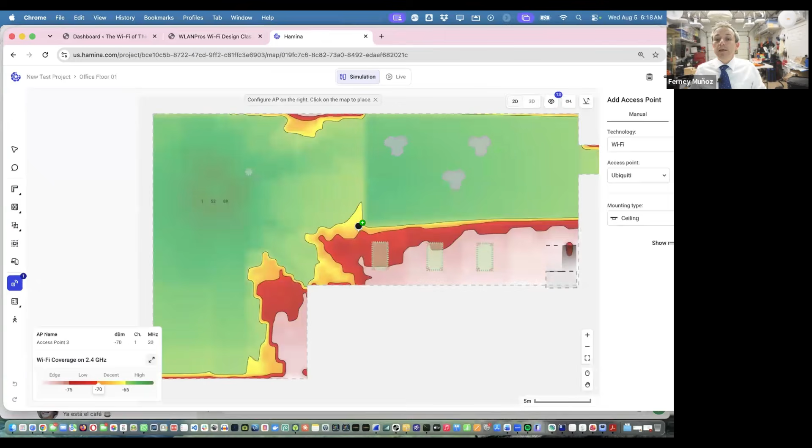The thing about slab, remember that we didn't know what the attenuation was? It was if you only, let me just bring this guy over here. This window's too big. Okay, if we go to slope floors, it's actually raised floor.

Yeah, slab only. If you choose slab only, because what we're talking about, for those of you who haven't been here, is when we add the attenuation to the floor, when you create the building, you add attenuation for the thickness of the floor in here, okay? The slab, in this case, when you add this slab, let me just show you the options. If in here you mark slab only, then the attenuation is the attenuation of the overall floor.

See, when you remove that one, you can specify what that slab is, because you might have some areas where, yes, the floor is a certain thickness and certain attenuation, but you might have stairs or other areas that have a different attenuation index. So you can come and specify what it is. If it's maybe just 5 dB per meter, or if it is actually thicker, then you can specify that here. But if you do slab only, you don't have that option to specify the attenuation, so it inherits the attenuation of the floor, which you specify when you create the building.

See, I went here to this option below the walls, and then align floors. That's when you create the building, and then you can drag and put more floors in here. Then you specify if there are floors with more or less attenuation than the other ones, okay? One thing that they don't have here that you can set in Ekahau is the thickness of the actual floor, okay? Because some floors are thicker, some others are thinner, so you can specify that in Ekahau.

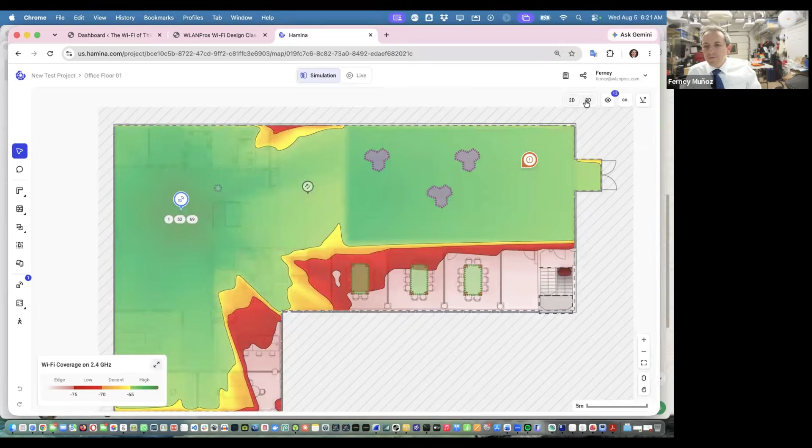So when you are doing just one floor, the height, let me just come over here. Let me just show one floor only. There we go. What he's asking is, this takes a long time to draw all the walls and doors. And then on top of that, if you're going to start drawing tables like this, is it worth it?

Because here's what happens. We have an access point. The access point is sending waves, double the distance. Hamina is just doing math, and it attenuates going through that wall and attenuates going through this glass. And then by the time the waves get to the top of this table, that signal prediction, you just switch this guy. Actually, let's move that access point here. Let's say I place it in this conference room right there.

The signal prediction, if I have my mouse over here, notice on the lower left corner, watch this guy that is green. As I move the mouse, there is a slider bar that changes the value. This value says neg 48, neg 46, neg 44. Right on top of the computer it says neg 50.

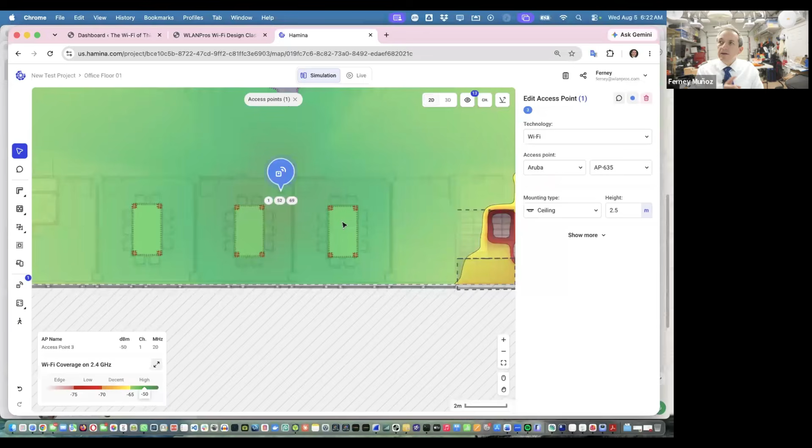So this signal prediction, see if I come to the global settings, by default is at 1 meter from the ground. Ekahau does the same thing. Yeah. By default, if you don't specify the height of the signal prediction, it stops at 1 meter from the ground.

Now, why 1 meter? Because the top of the table is normally at 90 centimeters from the ground. Okay, so you do signal prediction, double the distance, square the power, then signal power. Then what is the signal here on top? But what if you want to know what the signal is at ground level?

I went to schools, I walk in there, I was doing the analysis, and there were no chairs, there were no tables. And I asked the teacher, "Oh, are you guys cleaning or remodeling?" They said, "Oh, no. Here we're against the policy of having children sitting strapped on a chair and a table all day. So we let them roam free." And they had bean bags and all kinds of stuff just laying around for kids to just be whatever. So what is the signal at ground level?

Because we always think a client is a human holding a device, a computer, or a tablet. No, a client can be a robot. We had in the first part of the class, when we talked about the clients, the client can be a truck. The client can be a robot. Let me see, where's my stuff here? WLANPro. This will work. Let me open this real quick and remind you of what clients can be.

Because when we're talking about clients, where are the clients? So it can be sitting on chairs. The APs are under the seats. We did this at the University of Utah Stadium because we did the survey when there was nobody around, and it covered the entire thing. And then it is different when it's crowded with people. This is at the Sphere in Las Vegas. The access points are in boxes under the seats.

Clients can be inside a metal box moving around if it's a hospital and they have these metal enclosures. So the client is going to have a hard time sending and receiving waves inside those metal boxes. So in this case, I will have to look at just a little bit above 1 meter from the ground. In this case, the signal prediction, see, the antennas are up high. That's like 2 meters from the ground, okay?

The clients may be down at ground level, so it's 10 centimeters from the ground. The antennas on these robots are inside. They ended up putting the APs down low. So for that reason, you can change the height of the signal prediction. By default it is 1 meter. So the question is, is it even worth spending all that time drawing all those tables? Well, let me tell you where it's valuable.

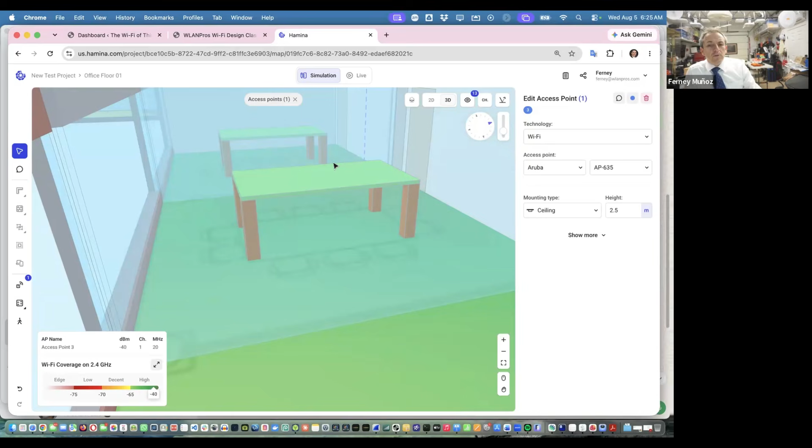If you're just one floor, and everybody has tables and the devices they're going to be using are at the height of the table, then it doesn't really matter if you put a table or a block or nothing under, it's irrelevant because the signal you're trying to predict is at 1 meter off the ground. But if you have multiple floors, let me just go to a 3D view. Right now I'm on the first floor. But what if I have

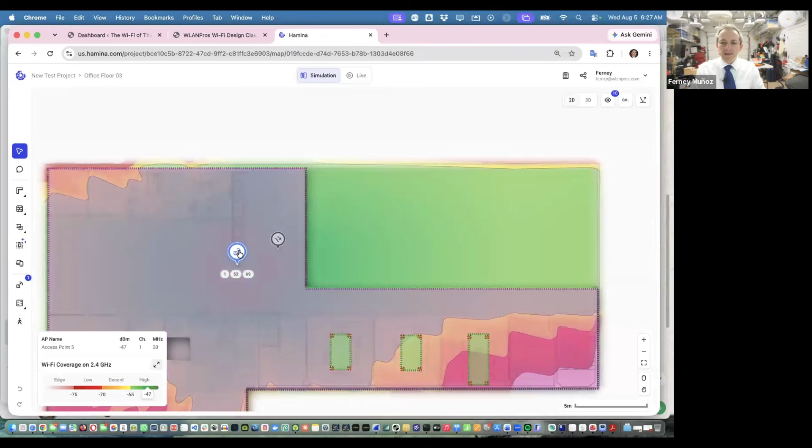multiple floors? If I have an access point here, the signal prediction for this one, let me make sure that I have Wi-Fi selected. Yeah. The signal prediction is going to be not only on this floor, but it's going to show how much of those signals bleed to the floor below. So let me go back to floor 3. If I have this one selected, let me for now hide the attenuation areas. We don't have the ceiling, because we learned yesterday how to draw a ceiling.

If I have this AP selected, on this floor the signal prediction is horizontal at 1 meter off the ground. If I go to the floor below, notice these access points. The access point on this floor is this one. Let me delete it. I deleted it from this floor, so this floor does not have any access points. Notice there is a grayed out access point with an arrow pointing up, meaning these signals are coming from the access point on the floor above.

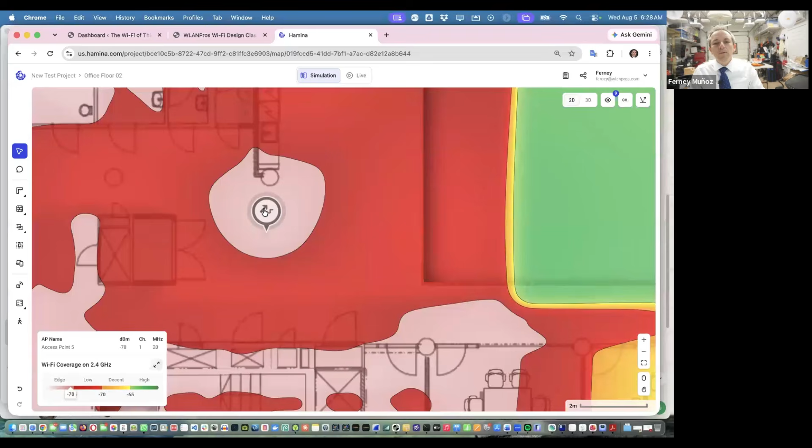And these signals over here in this conference room are coming from an access point on the floor below. I don't have any APs on this floor, but this one bleeds. So in that case, Gurpreet, having tables and stuff matters, because watch, if I go to this access point on the floor above, let me move it. Let me go to floor 3 and move it over here. I just put it right on top of this one.

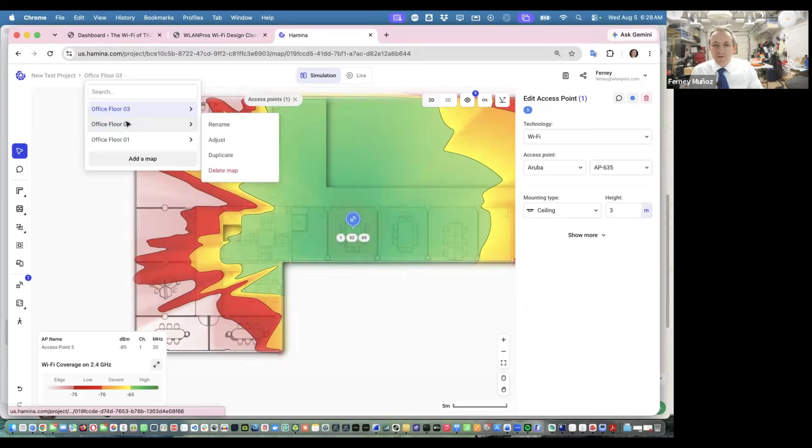So if I go to the second floor, the floor below, and let me actually go to the first floor and move that AP out of the way so we have a clearer view. Let's put it in this back corner for now. Okay, so let me go to the second floor.

So it shows that these signals are bleeding from an access point on the floor above. That's also taking into account the thickness of the floor. Watch what happens if I say the floor on the third floor is not 20 dB, it's only 10 dB per meter attenuation, you know, a thinner floor. So let's just go back to my signal prediction; notice how much more signal from that AP bleeds down.

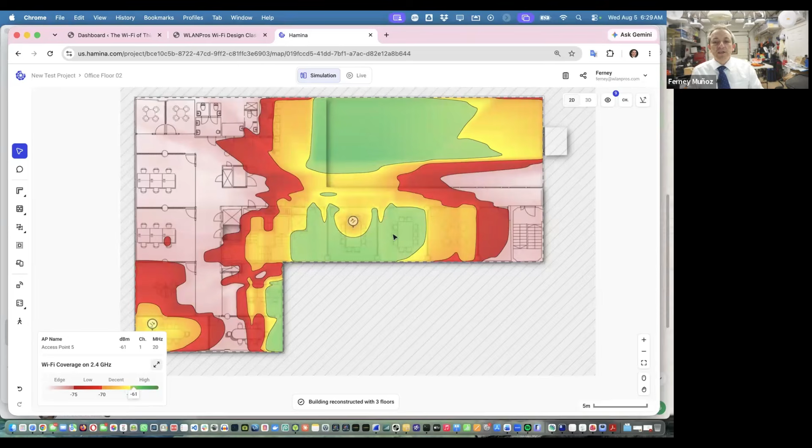Now watch this. If I go to the third floor, because right now under that AP, let me look at attenuation objects. And here's what I'm gonna do. I'm just gonna move that ceiling out of the way. Let me click on this guy, just delete it. I got rid of the ceiling. So I have a table. If I don't have a table here, see, I just deleted the table. Why didn't I delete the other 3 legs?

Let me move this AP to the side. Let me delete these legs and put the access point there again. Watch this. If I go to floor 2, I have more signals bleeding down now because I don't have a table over there. So when you have multiple floors, Hamina is not just doing signal prediction horizontally. It's also doing vertical signal prediction and takes into account not only the thickness of the floor, but also tables,

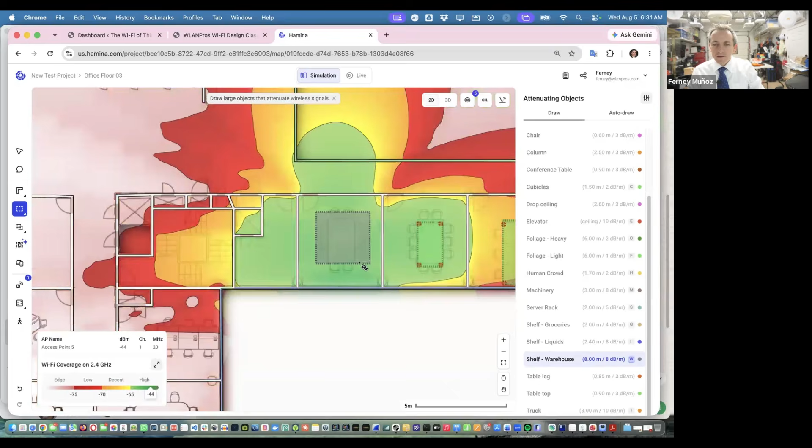racks. Look, if I add another attenuation object, let's just add column, chair. Where's the warehouse rack? Shelf, warehouse. Let's do this warehouse shelf. And let's just add one in here. Okay. I'm on the second floor. Let me go to the third floor. Let me add one of those over here. Okay. So now if I go and edit this guy, let's change the height not to be too dramatic. It's not 8 meters. Just say this is 1.2 meters in height.

Okay. So if I go to 3D, I just added those 2 racks or shelves in there. Let me go to the second floor. Okay, floor 2, right there. Go to 2D and delete this guy. Let me just come to the arrow. Delete this guy. Delete this guy. There you go. So now, remember it was really green before when I had nothing? Now that I added

that, the AP sends waves: double the distance, quarter the power. It hits that, it attenuates, then it hits the floor. Those waves get weaker, and by the time it hits this floor, it's not very strong. So yes, adding attenuation areas matters, because I'm looking at the bleed. And sometimes we want to make sure that if something bleeds down, then maybe relocate APs, because we have to keep that in mind.

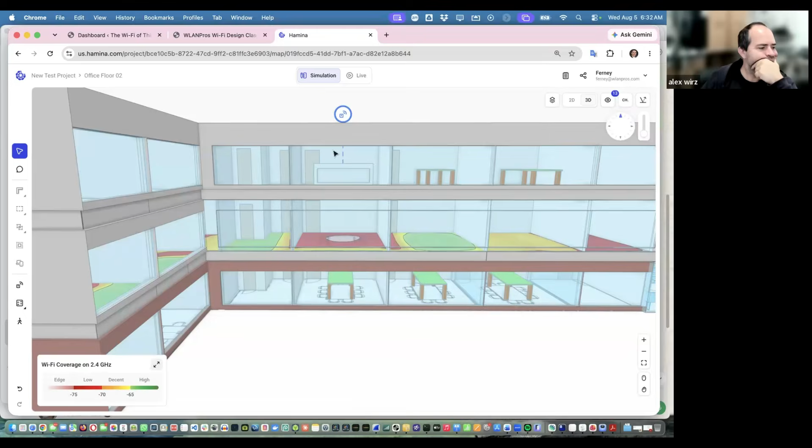You don't want to have it like, oh look, this room has coverage from the floor above. Don't rely on APs from other floors as your source of coverage or secondary coverage. Those are things we have to keep in mind, because now if you remove this guy, or let's just move the access point to the room next door. See, if I move this over to this table and go back to 3D, then it has more signals bleeding down, because I changed the attenuation.

It's just that here I can change the thickness of the floor or reduce it. In real life, you cannot just tell the customer, yeah, that AP from the floor above is bleeding too much down here, I recommend that you add another layer to the floor. That's not going to happen. You're not going to add another layer to increase attenuation. Then you have to start playing with power, location of access points and stuff. Go ahead. Somebody had something.

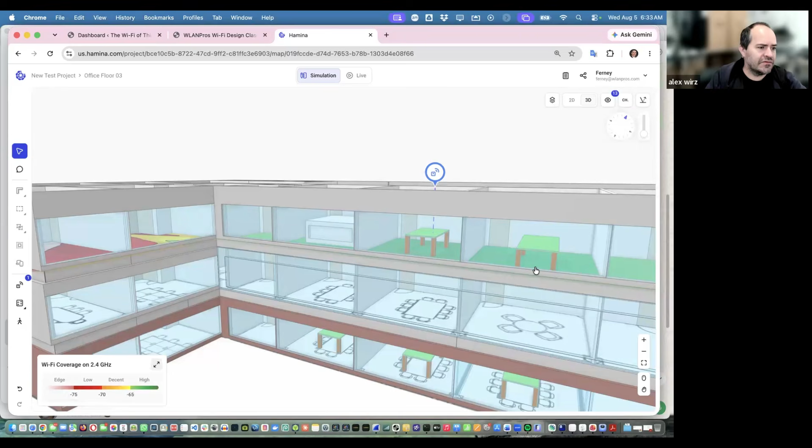Yeah, me. So the way I deal with this, but I'm mostly working on offices, not more complex environments, is I'll leave this for the post survey. So with the real measurements, I can select all the access points on a floor and go to upper and below floor and check how much signal is bleeding to these channels. But I think for predictive, sometimes it could be too much work, depending on how precise the environment requires you to be. It is way too much work. And that's why I never draw something like this with a table with legs.

You're kidding me? I would never do that. We did that in here just to show, you know, how to do it if you really have the time. But yeah, it looks good, but in reality, you just don't have time to do all this stuff. Check another thing I did in the chat window later.

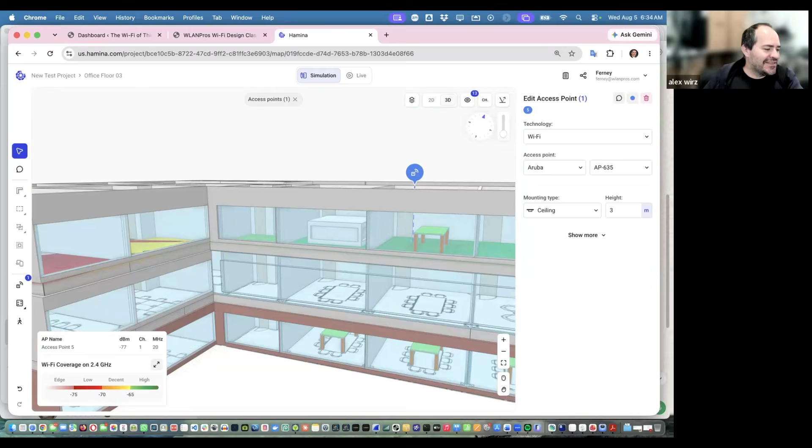So just one other thing, Ferney. I think, as Alex mentioned, you can do an AP on a stick. You can understand the bleed-through between the floors. That's something measurable. You can add it on. But remember how you were showing yesterday the duct, for example, or even at the care center, you had that big round thing in the middle of the floor. How do you find the real measurement of that object that's hanging in the middle of the air? Over there, when they had the things on the ground before they moved them up, I could measure the attenuation of that. But once they're up, it's really hard to measure.

The one thing you can do with the access point is just try to avoid those locations altogether. Because the problem is when you end up with those access points and then they put stuff underneath. Christmas decorations. At a shopping mall, they have the access point. It's all empty, but then Christmas comes, they put a fat Santa with a sleigh and deer hanging from the ceiling as decoration. Now that's in the way. Then you have to simulate those and get the attenuation of those things. How are you going to get up and measure that? So you just try to avoid those altogether.

Some of those are hollow, some are foam, but some are wood, or some are screens that are just metal structures or trusses with speakers. That's just solid metal with electronics. Try to avoid those altogether and put the APs, as I did over there, below those structures. I drew them more to show the customer, look, that's where the lights are, we have to avoid the screens. And then I drew a screen, because we had issues with the AP being in front of the screen. So we had to move those APs up and out of the way.

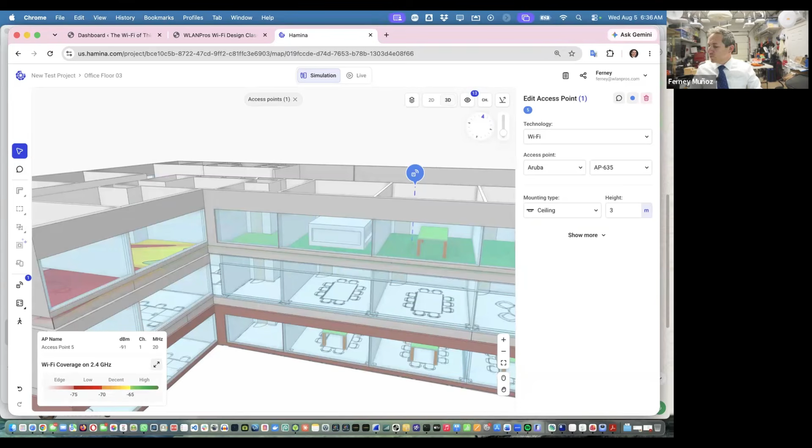Hi. In addition to attenuation, I believe in some sensitive designs, drawing tables or obstacles like that may also affect the wave behavior itself, like the scattering, reflection, refraction. I didn't have a chance to compare a predictive site survey and an on-site survey with Hamina. But I believe the time I could save drawing the walls and the building in Hamina compared to, for example, Ekahau, I could spend drawing the real infrastructure, like the tables, everything else.

Well, Walid, now you mentioned that, let me show you my absolute best and favorite feature.

Good morning, Tom. Morning, sir. Early. California. Okay. All right, Walid.

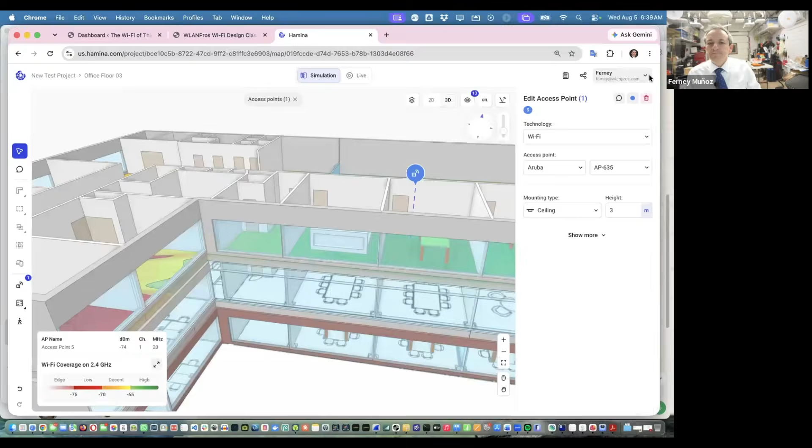Watch this, man. Guys, this is my absolute best and favorite feature from Hamina. Ekahau doesn't do it. Cedos doesn't do it. Wavelify doesn't do it. Hamina does. This is a predictive design. Let's say I go to 3D. Nothing here we haven't done. Well, putting colors on the APs, that's something we haven't done. I'll show you how to do that today.

So it's a predictive design. There are walls and doors drawn, access points placed. I did a survey of this facility, okay? Access points were placed, and here's the story behind it. See, it is all green, well, most everywhere. That's what we proposed. The customer said no, that's way too many APs. Let's remove that AP. We said okay, but you're going to need it. No, the AP from this room will cover that one, and the one from this room will cover that. We'll remove this AP. Okay.

So I left the AP there, but we made it red so I can highlight which APs the customer decided to remove. They left these APs and removed these, because they assumed this AP would cover that area and this AP would cover that area, so they didn't need those. This is a senior care facility where they take care of older people.

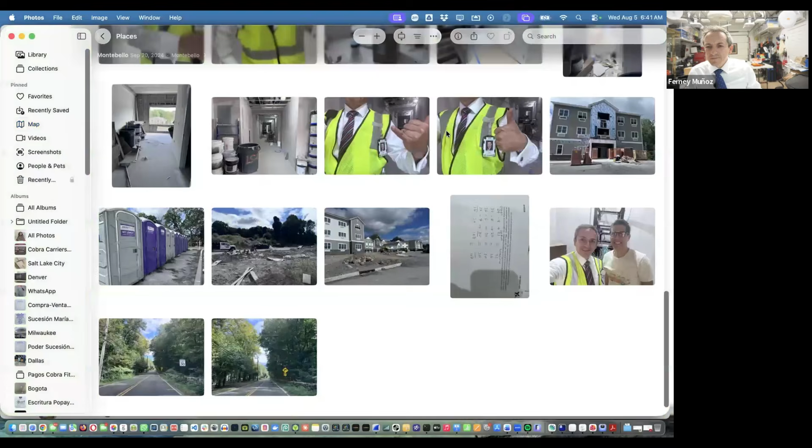Because I go do a picture. That place was ready. They said, yeah, go and do a survey. The place is finished. The place is ready. That was in upstate New York. That was actually not upstate, but it was about here, I believe. Let's see. Yes. They said the place is ready to do a survey. They're done. Almost ready. So yeah.

I go there. There's a big facility, multiple floors, and then I start doing my survey. And I ask the guys, how late can I stay? Because this is pretty big, I'm not gonna have time. And I was fixing cables and stuff, multiple floors. I can stay as late as you want. When I leave at night, the gate was closed. So I leave the car there. I'm small enough that there was a gap on the gates that I could go out, and I ordered an Uber. And while I was waiting for the Uber, cops showed up.

Here, where's my stuff? Cops showed up on the front and on the back of the property, coming from the building. I mean, look at the amount of cops. I had 3 cars on the front and 2 on the back. Lights on my face, hands where I can see them. What are you doing there? It was like 10 at night. What's the time? 10:35. And I could explain what I was doing, right?

But here's what happens. I go to a facility, do a survey, and watch. Eyes on the screen. I switch from design to survey, and it just shows me what the attenuation of objects and walls was. Again, simulation, same project, okay? I just open that on my phone. We'll get to surveys later in this class. And then I go in and do a survey. See, in here, there are no walls. It's just my walking path. So now I can use this, and this is what the other guys don't do.

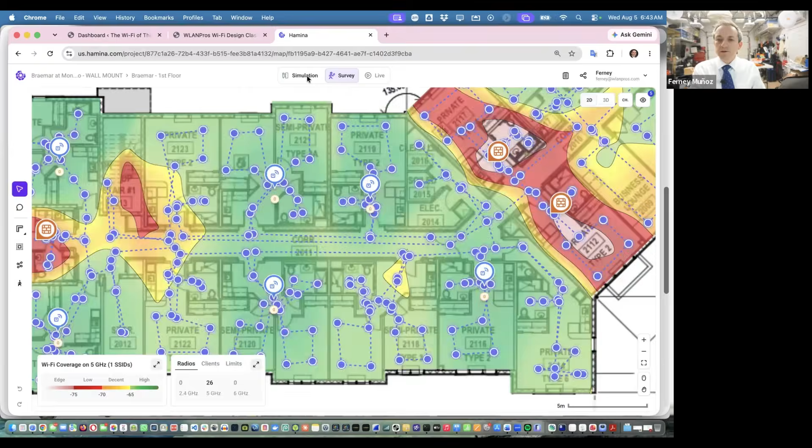Watch, let's say I move this to 3D. Let me go to simulation and move it to 3D. All of you can do this. Now you know how to draw walls. Now we're going to learn how to do the APs and move them around. This is the predictive design we present to the customer. See, if I zoom in and move things around, zoom out, and if I go to 2D, that's the area. 3D, that's the area. And I can switch from simulation and survey.

My map stays right where I left it, which is really great because then I can show a customer where the signals are not very good. That's what we recommended in the simulation, that you'd have APs, but you decided to remove them. So this is basically what you use as a warranty, or the "I told you so," just to show, look.

Did you measure the wall on your predictive in order to get the right dB? Not on site, because when we got the floor plans, the place did not exist. They were building it. So we couldn't go in there and measure, but based on the floor plans they gave us, we used estimated values, if they were brick or drywall. So if I go to 2D, I can see that these areas had brick. Is that brick or is that heavy? Let's see, drywall 4 dB. This stuff is concrete, 15 dB.

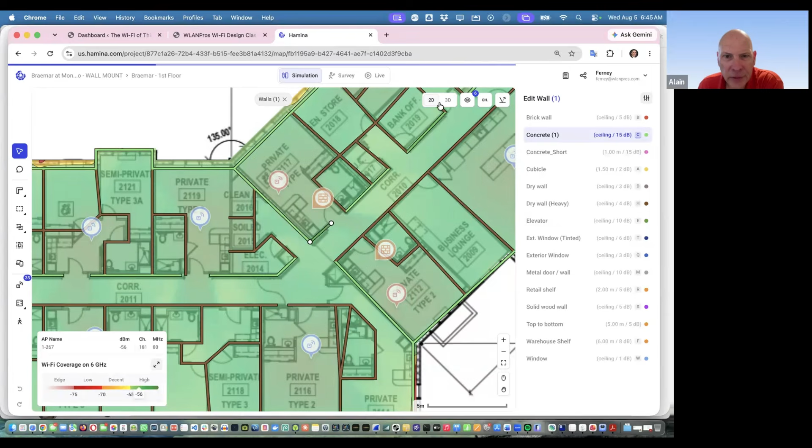Because the floor plans, see, if I say don't show me walls, Hamina identifies in the drawings that this is thicker, either brick, cinder block, or concrete. So those are concrete. These ones are drywall. If I say show me walls, see the difference? Yeah. So that's what we use. And then when you go on site, now watch this.

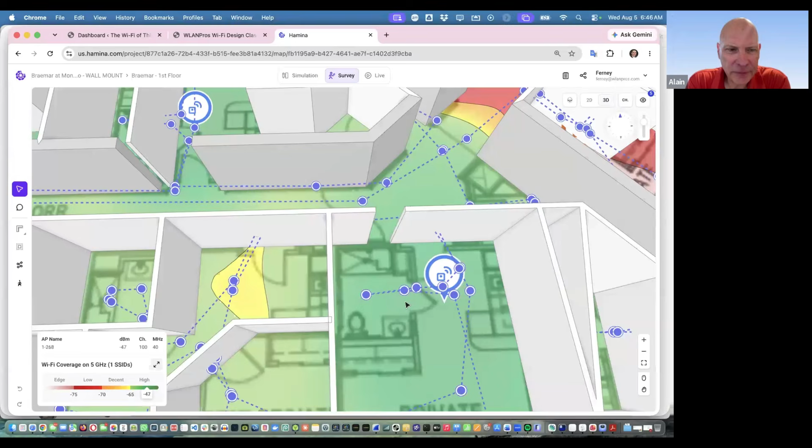All I do is walk, click, walk, click, walk, click. And some people say, oh, Ferney, why do you spend so much time in the bathrooms? Yes, I go and survey every bathroom, especially in this place, because this is a senior care facility. Where do older people usually fall and break their hips? In the bathroom.

So I want to make sure, and not only do I go and survey in there, I go in, close the door, and then survey and get the readings from inside the bathroom. Because if the older people are wearing a bracelet or a necklace piece that they can just press a button and call emergency in case they fall, and that's wireless, with Wi-Fi, then I want to make sure that there is good Wi-Fi there. So that's why it takes time to do a good survey, because I walk every corner of every room, including bathrooms, to get enough readings.

And what I measure in here, that's measured. Here's the best part. Watch. If I go to my simulation and I come down here where the readings are, since I already went on site, when I am doing my design, I can also use data learned from the survey. Ekahau does this, and they've done it for a while, and I love that. If you do a survey, you can use this data to do your design on top of the survey, because then you can say, if I was here and I have an access point, let's say I select this access point.

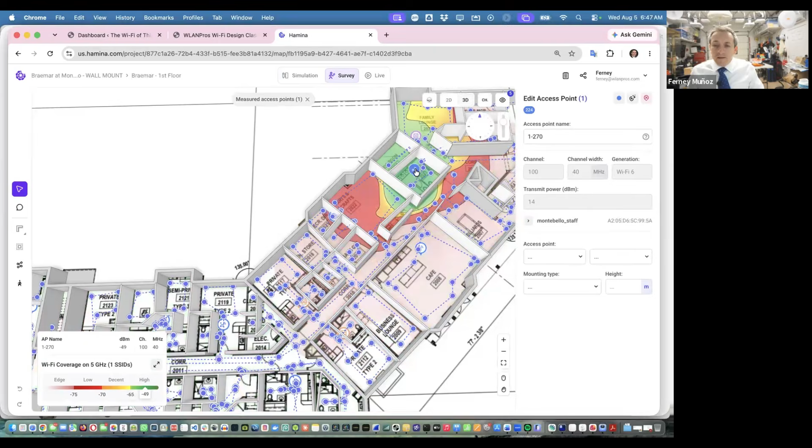This is measured. If I am there, the signal's pretty good. Next door, it's good, but not as good as in here. Same in here, and in here where it's yellow, it's like neg 69. See the lower left corner where it shows you what the signal is? As I move the mouse, right here, the signal is neg 56. I'm closer to a wall. Here, neg 69. Here, neg 71. So this is accurate because it's measured.

I was there. So if I was here and I measure you at neg 45, and then here I measure you at neg 47, then it's going to start using the attenuation that I measured from one side to another. Let me just hide the walls here for a second. Let me come over to my simulation and tell this guy to not show me the walls. Come on, 2D. I gotta go to 2D. Let's tell this guy to not show me the walls.

So what it's doing in the design, if I'm going to use survey data, is it uses what I measured here and what I measured there and extrapolates the data. If I saw you here at neg 45 and there at neg 47, it's going to say, well, this is probably a 2 dB wall. So it's going to use survey data for your design, and you don't have to draw walls. In that case, you just place access points. Ekahau does that. Hamina does that. And I think Tesos uses AI also in your designs. When we get to Tesos, we'll talk about it. But that's one of the advantages of being able to go on site. Not always can you go on site.

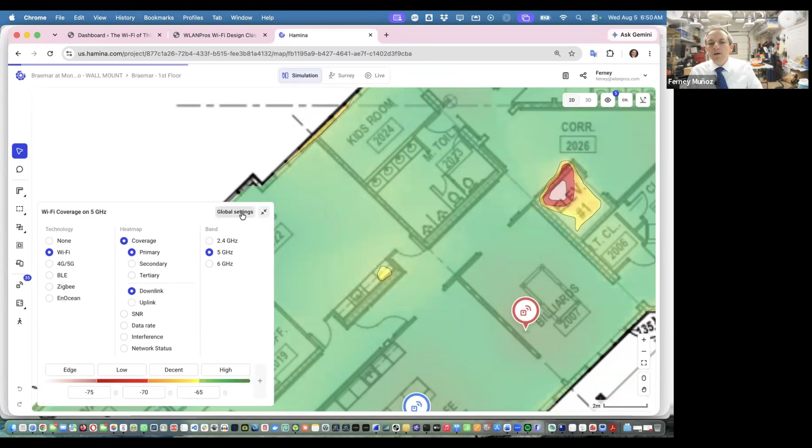If I go to the global settings, here is where we can set the opacity of the signal prediction, very clear or very dark, so that I can almost cover the map beneath me. This is the first setting. I like to have it in between. I want to see the signal, but I also want to see what's there. Oh, that's the bathroom. Because if I have it this strong, I don't know what's underneath.

The next setting is going to be client height. That's what we talked about. By default, it's at 1 meter. But what if I want to know what the signal is at ground level? Like, what is the signal?

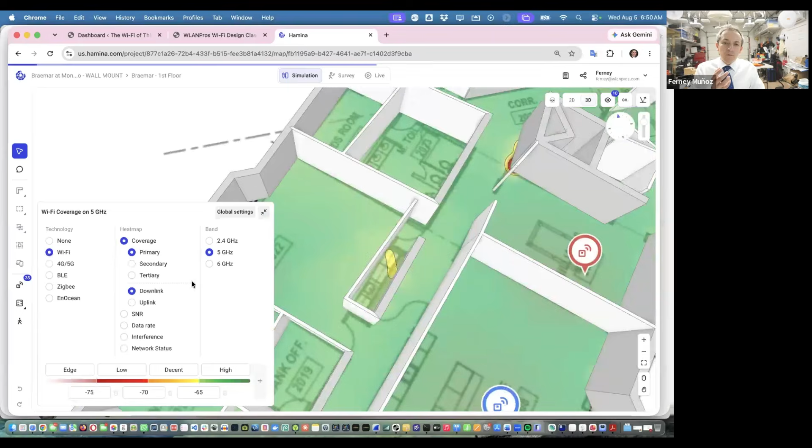Not at 1 meter off the ground, but how about lower than that? Because I want to make sure, for instance, in the bathrooms, what the signal is at 10 centimeters from the ground. In case a person falls, am I going to have enough signal at ground level or higher? Because when we were looking at the warehouses, if my antennas are at 2 meters, where are the signals going to be at 2 meters from the ground?

Then down here, AP shown on mouse over is this. If I put my mouse in here, notice to the left, there is a list of the access points I see there. We got Hamina to fix this for our survey in Toronto. This is new, because before, if I saw 80 APs, it showed 80 APs, but it showed me the bottom of them. So I could see the bottom 40, the weaker ones, and I want to see the top 10. So they changed this for us just 2 weeks ago.

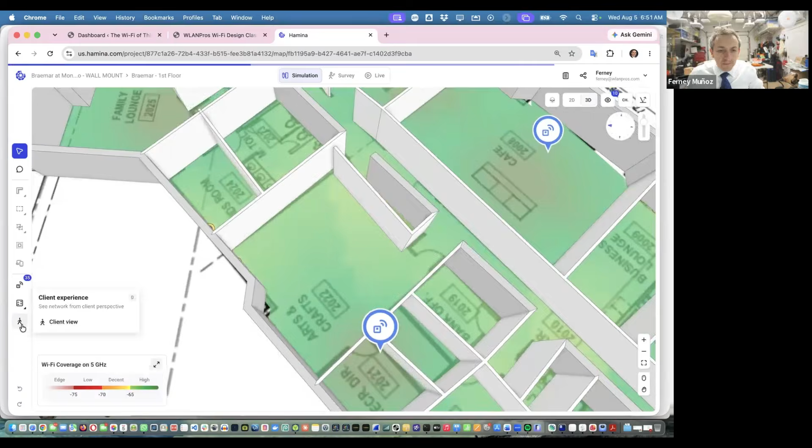If I come over here, global settings, on mouse over, I can say, just show me the top 8 APs or the top 3 APs. Below, that's the client height. In here, see that little man right there, Elaine? Yeah, I do. That's the client view, okay? That's basically what we call in Ekahau offset.

What does the client view? Which client? See, there's a list of stuff here for Wi-Fi. Let's say a phone, an Android phone, a MacBook, an iPad. So what would an Android phone see? Let me just go over and make sure that we do have it. See the little guy right there?

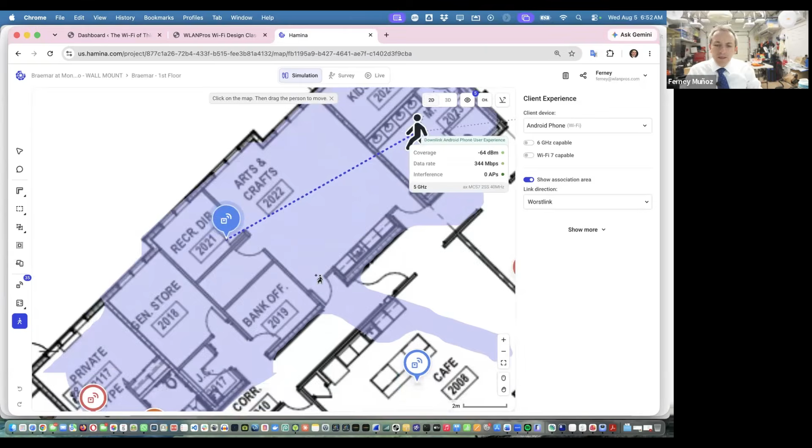Once I click on it, this is what that little man, that client, that Android phone would see in this area from that AP. This is doing kind of like the offset, but more realistic, well, realistic and not, because it's still simulated, it's just doing math, saying, okay, if I am the client and as I'm walking, which is my strongest AP in this area.

But, Ferney, you're under simulation now. When you do it on Ekahau, you would be under survey with measured stuff from your Sidekick too. Right? And then in here, if I do the survey explorer, it shows what I measured that day with whatever device I was using. In here, let me see if there is a way to set offset. I think Hamina believes that offsets are not required in here. Let me see.

Sorry to interrupt, but that's what I was really wondering about, because yesterday I made a simulation in Hamina and again in Ekahau, just to compare, because I recently heard them say, we don't believe in offsets. We believe that minus 65 should be minus 65, whether you're in simulation or measured. You shouldn't be worried about that. Your software should just always say minus 65 is minus 65.

Good news, the simulations look identical. So that means that the math is indeed the same. But it also means that minus 65 simulated on Hamina is the same as minus 65 simulated in Ekahau. And if you measure with the Sidekick, obviously that minus 65 will not be the same as the minus 65 you get from just the free space path loss. So that makes me really wonder how they treat this, if they indeed alter the measurement from the Nomad or the clip to represent the minus 65 from the simulation, or if they just haven't done that completely yet.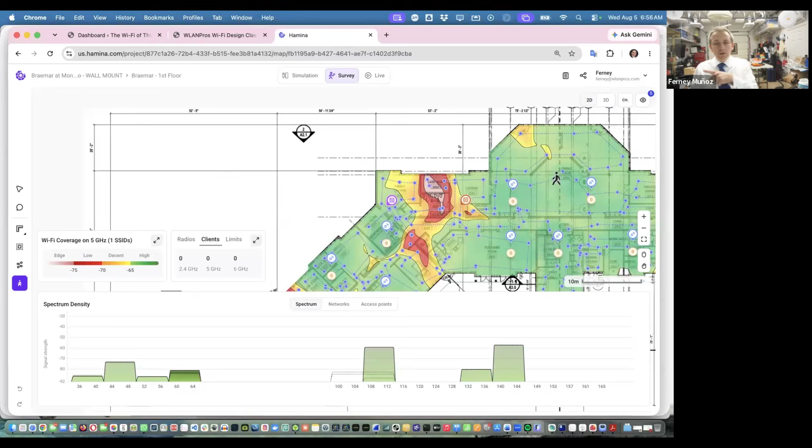If I was going north-south, I got one heat map. If I was going east-west, I got a different heat map. It's just nearly impossible to get a repeatable heat map. I tried roughly doing the same thing, to make a comparison between the simulation and then the Sidekick measurements, to try to make a kind of offset between, say, free space path loss and then the receiver end of the Sidekick.

But there's such a big difference in measuring in, say, a football field where you're completely open, and just your street, which is also kind of open, but you do have some houses and cars parked with some reflections, which already alters this factor so much that it's really impossible to come to an accurate measurement, to say, well, this is roughly the offset for every situation. It just differs so much that it's quite hard to just say, oh, let's just compensate the measurement with 5 dB, and that's what we should see in the simulation, or vice versa.

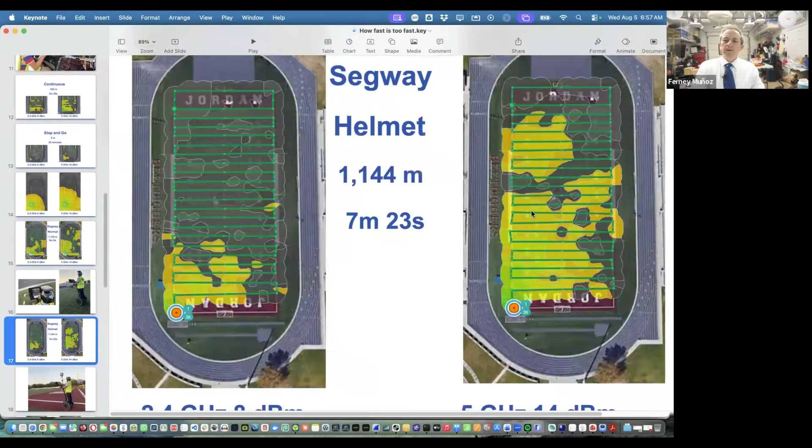And that's why I ended up going to the salt flats and just playing with Wi-Fi over there, for what you just described. It happened that I was doing surveys in a football field, and I came across a phenomenon that didn't make sense. I went to a football field because it's open. There's nothing. And here's the access point. We set up one of these trusses with access points in one corner of the end zone, an access point at a certain height sending waves.

It's open space. Free space path loss: double the distance, quarter the power. As I went away from the access point, the signals got weaker and weaker. And that makes sense, right? It got to a point that it was like negative 70. Following the laws of physics, those waves keep getting weaker. But here, they got stronger as I got further away. And I was confused: why does this signal from this AP get weaker as it goes away, and then it gets stronger?

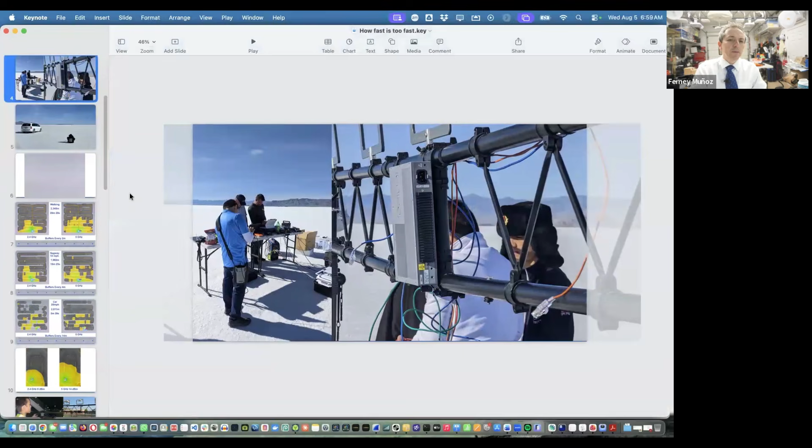Well, it happened that in these football fields, there are bleachers. There are metal structures out there, which is what Glenn just described. There are going to be reflections, and those waves will bounce, and you're going to see them in different places stronger. And this is what I was telling you about, depending on how I was walking. That's why I ended up in the salt flats. I went to a place where there were no trees, no houses, no buildings, no bleachers, nothing nearby, okay?

Because I was trying to test the speed. This is walking. Those are the heat maps I got, the distance I walked, and how long it took me. This is on a Segway. This is in a car. Going faster, you collect fewer data points, fewer samples. My confusion was, if this is all open space, speed seems to matter based on the number of channels you're scanning and such.

But then in the design, when you place this in Ekahau, see? It's a football field, there's nothing in there, and it just shows you what you should see. This makes sense? This is predictive design. So I started surveying, doing continuous. And here's when I realized that going in that direction, I got one reading. Coming back,

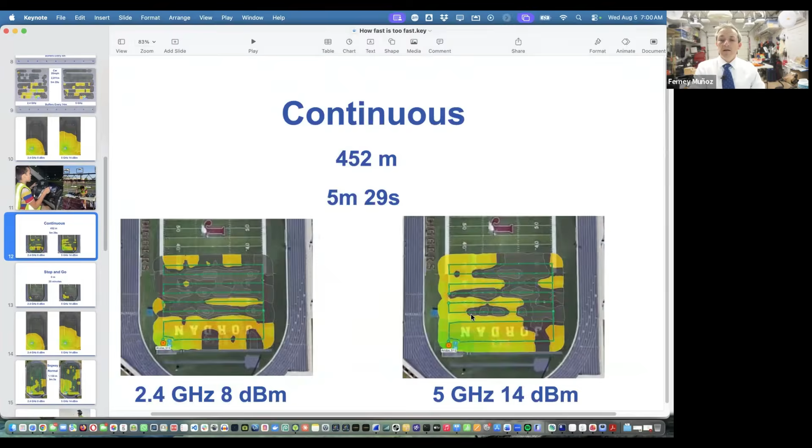at the 5-yard line, it was bad. Over there, it was good. And then coming back, it was bad because my muscular body was blocking the Sidekick. I had the Sidekick on the side. As Mark said, it depends on which direction your body is facing and how the Sidekick was facing. So I was covering it, and I was getting different signals. I know this is design, we ended up talking about this, but these are concepts we have to cover, okay?

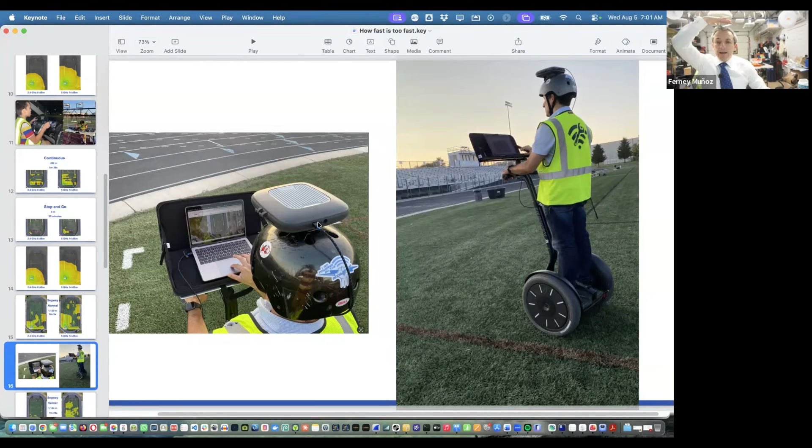Because the client offset and the signal prediction is one thing, okay? It says if you place the access point there, it's free space, and this is what you should see. But this is what I was seeing. Because what I ended up doing is, so that I did not block my Sidekick with my body, I put it on my head and said, okay, if I don't block it with my body, how is this going to look? And it looked different.

And I said, okay, what if I put the Sidekick up above, in the way that I carry it vertically, but then above me so that I'm not blocking it in any direction? And then I started surveying, and this is what I got. This is the heat map going east-west. This is the same survey, same AP, same height, same device, same speed, same everything, but going north-south.

And here's a more shocking revelation. This is what design should show us, that that's what the coverage should be. This is the heat map I got going north-south, going north-south the other direction, going east-west. So which one of these heat maps are you going to show your customer?

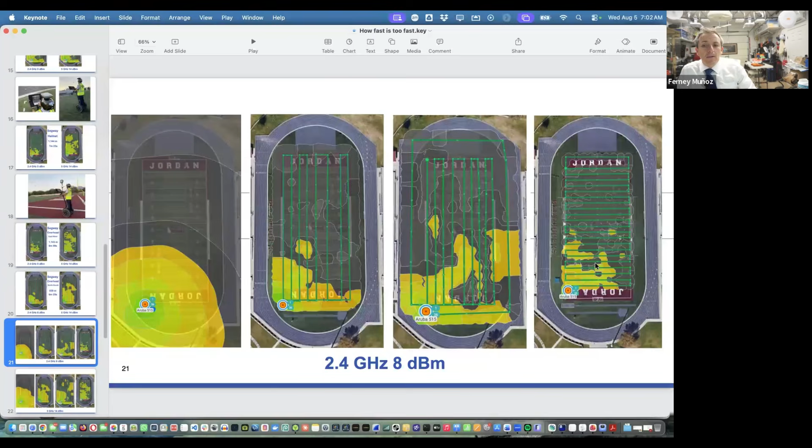Because design said that, hey, you place this access point here, it's going to cover this much at that power level, at that height, with that radiation pattern. And then based on how you survey, this is what you see. That's 2.4. This is in 5 gig. So which one is accurate? They all are, but with the note that it is as it is measured.

Which is why I personally always do both of them, which takes a lot of time. So if you go into a room, I always do that room in both directions. Absolutely. If you have the aisles in a warehouse, I walk them both directions. But it also means that you have to look at these results in more detail, because as you can see in the one where you go one way and then come back,

there is a difference between both, and you have to treat them separately, because sometimes it seems less than the other side, but it really shows you useful data, but it messes up a little bit, say, the green picture for the customer. So it requires more explanation to the customer to understand what they're seeing.

You do two separate surveys, not walking in both directions on the same survey? On the same survey. See, on the same survey, you walk each room twice. Right. Especially, the rule is just walk both sides of what you care about, and the more data you collect, the better. Now, this is not just an Ekahau thing, okay? No. Don't think I'm picking on Ekahau.

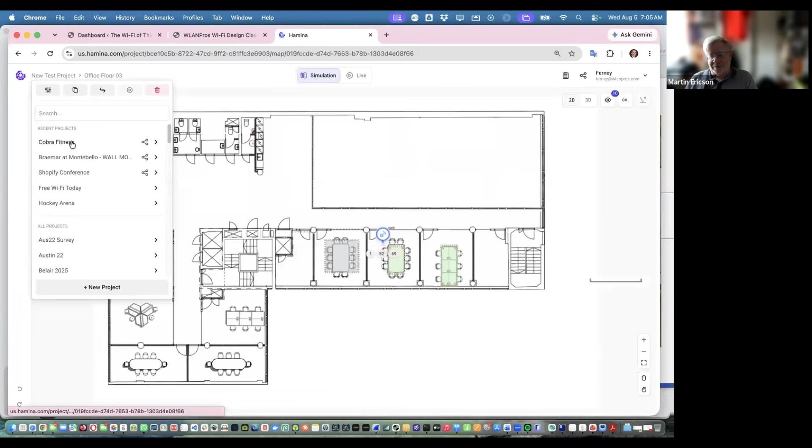Yeah, I asked Jerry a couple of years ago which values are actually used when creating the heat maps, and he couldn't really give a good answer. I was asking, is Ekahau using the best value it recorded, which would be when you're going towards the AP, or does it take an average of the worst and the best? And he wasn't sure. So that's another factor, that we don't really know which of those measurement points is used. And it just gets an average of all these things. I'm not sure that they do.

In some cases, I think they do. And the more data you collect, because it's doing interpolation of the data in between the measure points. You can see that quite clearly if you move to the point view. So in AI Pro, if you don't go for the rounded visualizations and you just go for the measured points, then you can clearly see that you might even have a gray point next to a green point. And then if you take those values and the value that you really see in the interpolated result, that's really kind of the average of the measured points.

But in general, that then tends towards the better side and hides a little bit of the worst places. So I even have a case in a marine ship where that leads to showing you that there's still coverage in one of the cabins, but if you look at the points, then there's absolutely no coverage at all in that area. Yes.

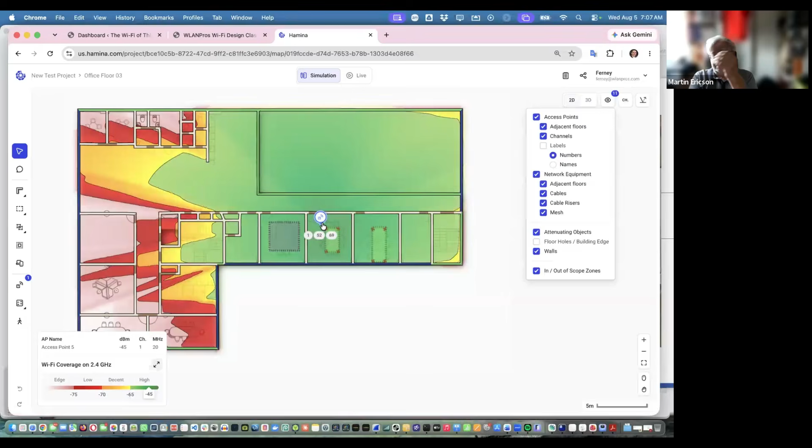I was walking exactly along the same line. I was not doing like 2 meters apart or something like that. Back and forth, exactly in the same line. Same line. All right, and we'll cover the survey portion later.

Now let's finish what we started. I mean, this is a great conversation. See, that's the advantage in here, is that we don't have like, guys, we have to hurry because we gotta finish class. Like, no, let's take our time. If we don't get to placing APs today, guess what? We'll do it tomorrow. It's okay. We're in no hurry.

But then this explains how better to design. We're talking about, do we then go and measure the walls? Well, if you can go on site and measure the walls, sure. But if when you were designing, the building didn't exist, there's no place to go measure. Even if I go now, what's the problem with doing the survey now? You have all this stuff along the way. So maybe if the access point is wherever it is, and I'm on the other side, maybe on the map it's going to look like this is a bad spot.

Yeah, because you had tons of stuff that is not going to be there in real life. Once they clean this up, this is not going to be an obstacle for those waves coming from the AP. So those are things that have to be considered. But I cannot show up on site, fly all the way from Utah to New York, rent a car, drive up there, and then say like, oh yeah, this is not ready, I'm going to come back later. Like, no, I'm there. I have to go.

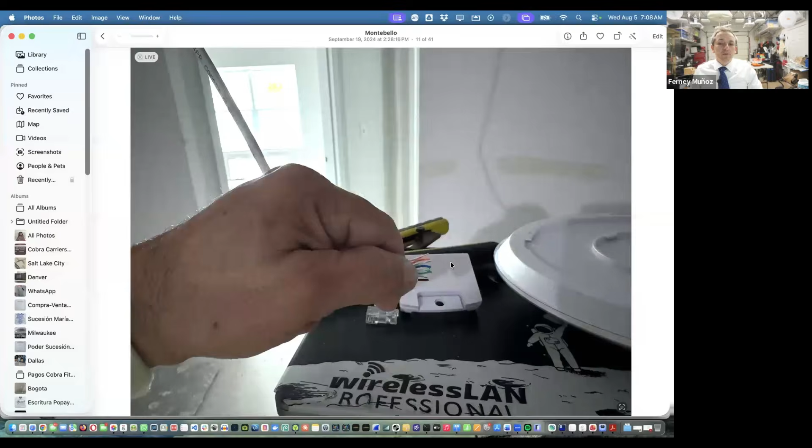And as a matter of fact, I spent part of my day re-terminating cables because they had just terminated them wrong. Some of them, not all of them. There were just a couple, but when you're on site and you don't have the tools, 4 cables become a 2-hour project, trying to re-terminate them, trying to find the tools, trying to get somebody to help with a ladder, getting up there. So carrying all the tools all the time is going to help. And this is the problem. You do a survey and you're going to have all these obstacles that you're not going to have once the place is finished. Okay.

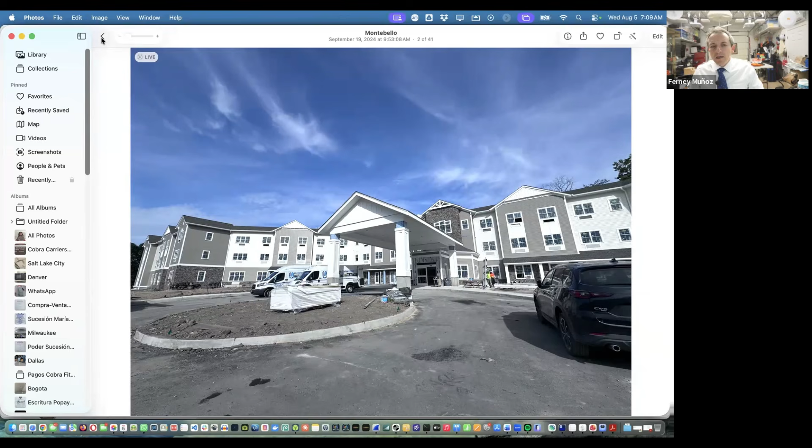Hey, Ferney. On that senior care facility, did you have a client device in mind that you started the design with? And the second question is, in Hamina, can you actually, after you do your survey, see your client roaming to the different access points in real time? If that makes sense. Okay. Yes and no. Let me just start with the first question. Yes, when you're designing, you start with a client in mind. And here's the thing with the offsets that we were talking about. Ekahau calls them offsets. Here they call it the client experience or the client device.

This is basically, if I have this access point selected, the signal predictions that I see right now, they're just raw RF. This is what should be in the air from that AP. Watch this. That AP with these antenna patterns at that height, at 3 meters, at these power levels. Those APs at that height with those radiation patterns, with these walls around them, it sends waves, double the distance, quarter the power, and then the colors just represent a value in dBm. This is what should be in the air.

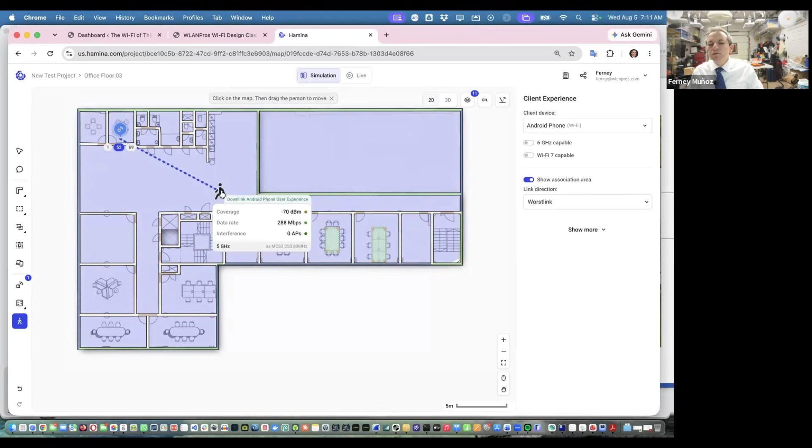If I go to the client view and say like, no, the client that I have in mind is a Wi-Fi client, and let's say here they're going to use an Android phone as the client. So what is this client, if I place it over here, gonna see from that AP? Notice that right there, it's a neg 70. And then you're just gonna come and say like, here's neg 69, neg 70, neg 71. This is doing signal prediction.

And it is subtracting. I don't know, let's just pick a spot in here because I don't have an easy way to compare the two. Let me see, interference, APs, neg 59. Say that right here on this corner is between neg 58, neg 59. If I switch to just the regular one, right here, it says neg 54. See, same corner, same place as where I had the little man standing.

So this is what should be in the air, neg 54. If I switch that to a client view, it says it should be neg 58. So it is making it like 4 dB weaker. It's an offset. That's what Ekahau calls an offset. But here it says 5 gig, and in the signal strength, it's at 2.4. So does this also only work on 5 gig?

Let me switch it back to 5 gig. Then let me switch this to 5 gig. And let's just go back to here. Neg 60. Go back to this guy. Neg 58. So this is what an iPhone or an Android phone would see. Which, again, this is, I don't know, just applying it. Because how is the phone being held?

At what height? Yeah. We've done testing that if you have the phone vertically with this hand, you see one thing. You have in the same position, same orientation with the other hand, you see something different. If you just move it a little bit, it changes. You get closer to your body. If you put it sideways, if you put it flat, if you put it flat on top of the table, then it sees different things all the time.

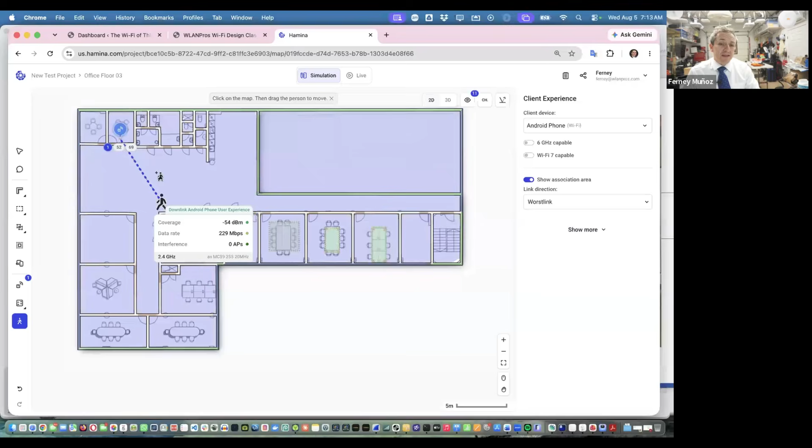So there are also the attenuation areas. In here, we just have walls. But then in real life, there are going to be desks. There are going to be filing cabinets. There's going to be other stuff that is not accounted for. That's why when you go on site and do a survey, you're trying to get a more accurate measurement of the real life environment. But as you could see on that site, it was not as close to reality because the site was still under construction. And there were still a lot of obstacles in there that I would not have once the job is finished. So it is so relative. And it so depends on what we are trying to prove.

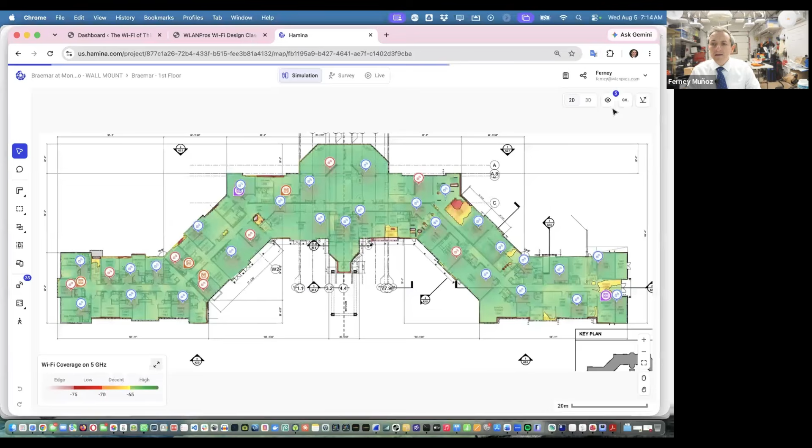The design, you start, and in many places, most of the time, you don't get access to a building to go and double check and measure. If it's being built, all you have is a floor plan. And they said, I need to know how many APs and where I place them. And that's when we go to these sites. Let me just go to Braemar stuff. That's why when we do the simulation in these sites, you just go with your instinct and then just add what these guys have added to the library of materials. They have tested, okay?

The thing is that when we're talking about a brick wall, is it bricks made in Sweden or is it bricks constructed in the Dominican Republic or South Africa? Because the clay is different, the construction is different, the way they bake the bricks is going to be different. Or is it bricks in the US? The bricks in Sheffield used to be made with slag from the steel works. So there you might as well plan them with iron. A steel wall, not brick. It's ridiculous. And you wouldn't know that looking at it unless you try to drill it.

Yeah. And the problem is that people use these libraries that the vendors provide us, like it's the Bible of attenuation materials. And people post the Ekahau slide in class. We had it, like brick 10 dB, drywall 3 dB. And it's like, drywall half an inch or 3/4 inch, or is it drywall with wood studs or drywall with metal studs, or is it drywall with, I mean, there are so many things, and that's just a reference, okay?

Because we don't know exactly what each one of these means. It's just a number. When you go on site, then you measure. And yeah, if you have access to a site, that's great. If you don't, then you try to do your best. This is why going on site and getting samples and doing AP on a stick or just doing a site visit to double check all this stuff helps a lot. Because design is just design. We're just predicting. We're just trying to figure out the best location for the access points. And that's what we do now.

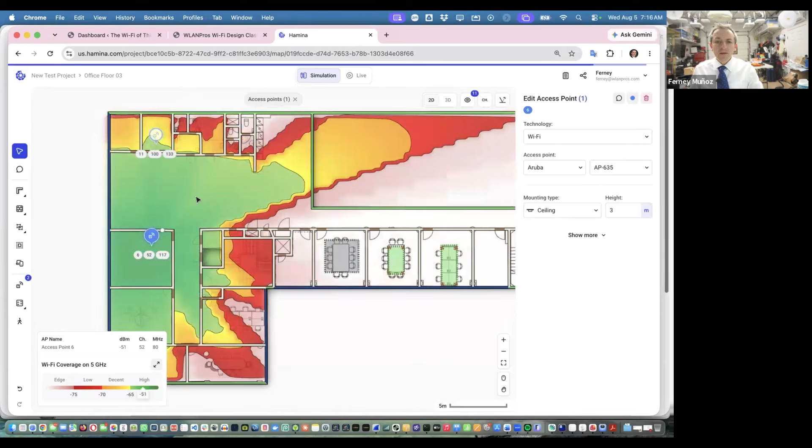If I'm going to use this access point, I can just Control-C and Control-V and start moving this guy around. See? One of the very nice things that Hamina does is that as I start placing access points, notice that the channels start changing. In Ekahau, I start placing APs, and I don't know if online, Gurpreet, or you guys have been using Ekahau online lately.

My account was disabled and blocked, and I'm on the shit list for Ekahau, so I don't have an account anymore. So I don't know.

It changes. It changes? Okay. Yeah. So they're following what Hamina is doing. So client view, Ferney, client view shows downlink user experience in Hamina. How about uplink? Is that important? Well, it can be. Let me see. Is there an uplink? I think there is an option to set up on the right side. Where you now see worst link, you can select uplink or downlink. Okay, here we go. Right there. You can check the uplink. Let's see how much it changes.

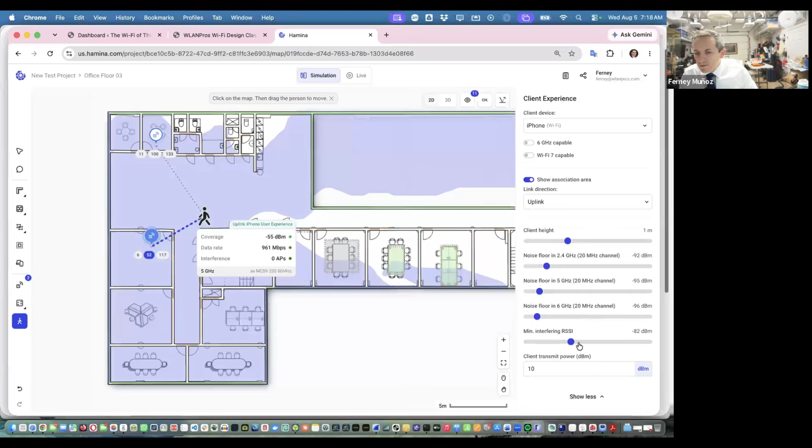So -55 uplink. Did it change at all? Hang on. Probably not, because by default they have 10 dB power for the AP and 10 dB power for the device, so it should be symmetrical. Depends on the antenna of the device as well, doesn't it? Client height, noise, minimum RSSI, client transmit power 10 dBm. So many variables, man. Where do you set that? And you cannot really set the transmit power on your device.

And here's the other thing. Once your battery goes down a certain level, the device starts using fewer spatial streams, starts lowering the power. The maximum power is going to be less anyway. Power depends on the modulation. Yes, exactly. Yeah, let me go back to the offset quickly.

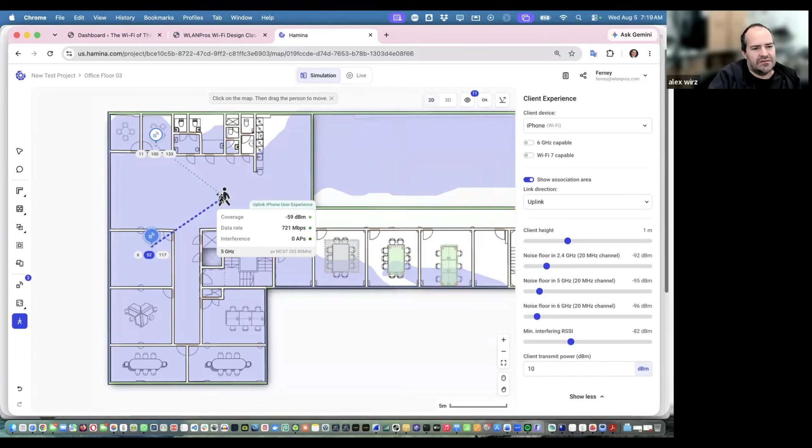For post surveys, I truly use offsets to try to evaluate if the offset of the cell phone has good coverage. But for the predictive, I do not use offsets because basically the offset depends on the access point power. It depends on the type of client. And when I do my surveys, I usually put the power level a bit lower, so I use 5 or 8 dBm when I'm doing my predictives, because they're mostly office environments, with a high density of users, etc. So does the offset truly matter, or can we compensate for this in predictive, not for post surveys?

Well, for predictive, I wouldn't bother too much with it because, I mean, you're just removing dBs off of your design. If it says in the air that it should be -60 and you go in Ekahau, for instance, and apply an offset, it removes 10 dB. So it's like, oh, if I have -50 in the air, then a mobile device would see 10 dB less, -60. And that's what it does. It's the same. Some other people take the approach like, you know what? In here, I'm going to design for -60 everywhere, not -67, -60.

So let me just come over here and say, show me green where it's -60. Okay. Then it just shows that AP, and -60 is where it's green. So if you want -60 everywhere, then you're going to need more APs. Remember, this guy used to come all the way out here. If I change the setting in here, I'm just adjusting where I want my green to go. See, now I have more green.

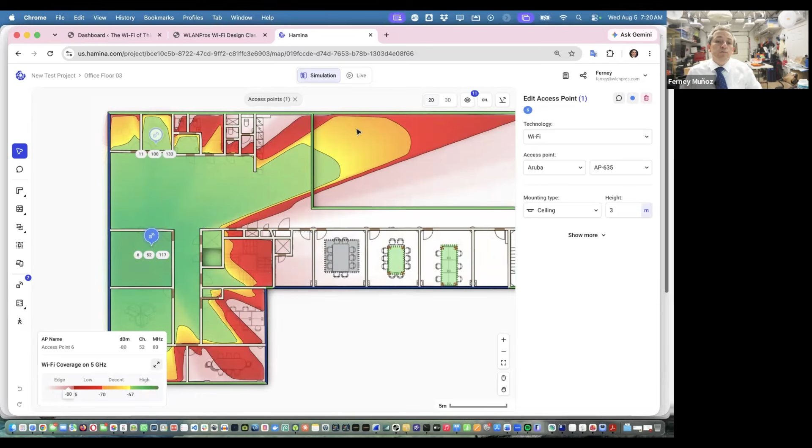So it's just, where do you apply the offset? Some guys design for a stronger value from the AP in the air because, well, my devices are going to see less than that anyway. So where do you apply it? Here, or as an offset? Because when Ekahau came out with View as Mobile, we asked them, oh, you added that button there, View as Mobile. Yeah, just in case you want to see the offset already applied. So like, okay, when you say mobile device, which mobile device?

Well, as a smartphone. Okay, which smartphone? An Android phone, an iPhone? What type of smartphone? Even Androids. I have an experience. I was having 2 bars in a specific location, and my friend with an Android phone, a Samsung. Mine is Motorola, and his was Samsung. So he wasn't seeing the SSID at all. So it's the same operating system. We have both 100% battery.

At WLPC in Phoenix, we did a test many years ago, that we sat at a table and put an access point sending 2.4 and 5. And then 8 meters away, we sat another table with tape and marked where we wanted people to put their phones. And we asked all the people in the audience, come put your phone, stay there for a minute, listen in 2.4, listen in 5.

At the end of all the tests, all the iPhones, and I was talking about like iPhone 6s or something like that, if that tells you how long ago that was. Same distance, same height, same power level on the AP, same type of phones, same orientation. There was about a 12 dB differential between them. Same brand, and you know, iPhones are pretty consistent, and they all saw different things.

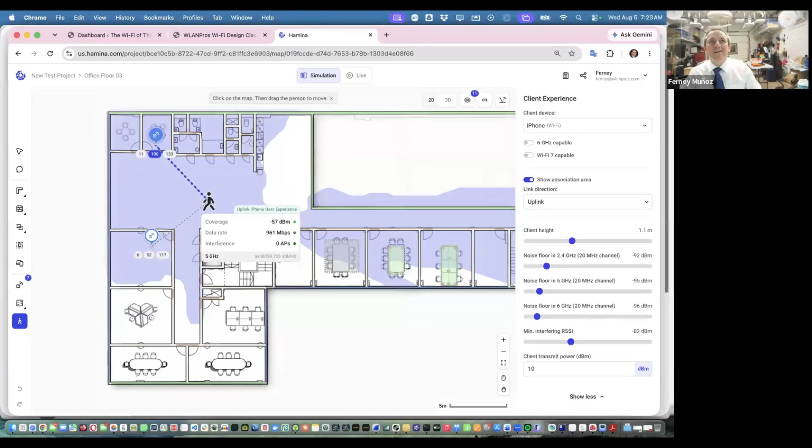Hey, Larry, good to see you here, man. I haven't seen you here before. Thanks for coming. Yeah. Right, Wally? So actually, if we rely on... Hey, you know what? We should have a rule here that if you're gonna talk, you have to show us your beautiful face. Oh, sorry. Okay, tomorrow I will make sure of that. Okay, we'll let you slip that through today. Let me have an exception today.

Go ahead. Okay, so like I was saying, if we rely on mobile devices, I'm designing hotels, so if I allow for mobile devices in predictive site survey, it will end up over engineering, and sometimes for mobile devices it becomes ridiculous. It shows me that I need two access points per every guest room, while we usually do one access point in every other guest room, or sometimes one access point per room. If we switch to mobile devices, to have entire coverage according to the standards, it will end up two access points per guest room.

Yeah. And I think, Tom, we probably only answered one of your questions so far. You start with a device in mind. Sure. And the recommendation has been the weakest one, the least capable, most important. And that has changed over the years because we used to design for that one device. We still have to identify that device. What am I designing for? Is it a warehouse and the most important device is a barcode scanner that is an 802.11g device because they have hundreds of them and they're not going to replace them? Then we have to design for that device in mind.

And then it's not only just signal strength and where do I want the waves. You now have to start talking about the configuration of SSIDs. If the client device is a 2.4 only device, then 2.4 is going to be your main band where you have to make sure that 2.4 works everywhere. You need 5 gig and 6 gig? Sure, there are other devices. There are tablets and computers and IoT sensors, and whatever else is there that you have to identify as well.

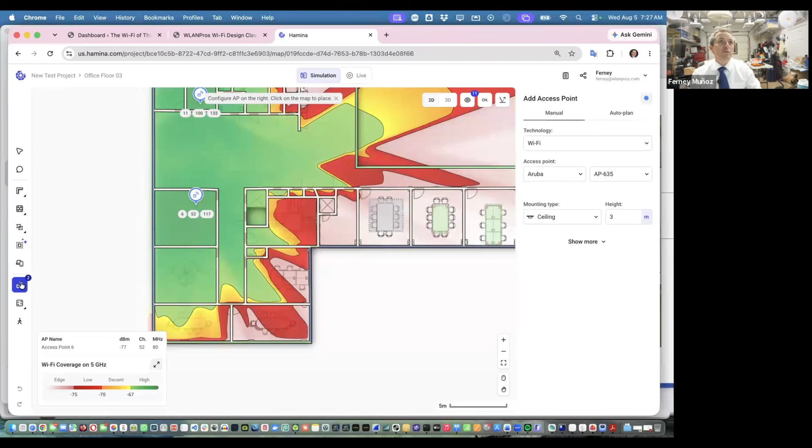All of these things have to be considered when we are designing. We are simulating an environment, and we are simulating the walls and the doors, and all this stuff. And placing access points right here is just to address the coverage thing. So the access point tool, hey, this is what this session was all about. An hour and a half ago we should have been talking about it. But hey, we had great conversations. This is the nice thing, we start answering all those questions, and we have to understand all this stuff so that our design starts making more sense.

If I need more access points and I need to cover this conference room too, I come and select the access point tool. To the right, it's going to be access point. I'll be with you, Martin. You're going to select the technology because these guys can design also for 4G or BLE. Let's talk about Wi-Fi right now. You choose the model. We had Arubas. Let's just choose a Cisco. I don't know, 9166. Could be 9120, a 9120 with internal antennas. Yeah, this, an Omni. Let's put some Ciscos in here as well.

And then in here, you define if you're going to place this access point on the ceiling or on the wall like a clock, or on the floor. How are you going to place it? Is it going to be on a table? Where do you want it? Let's just leave it on the ceiling at 2.5 meters from the ground. And then if you expand the show more, you can specify the power settings for each one of the radios.

Now, as I place this access point, it automatically starts switching the channels, and this guy is only 2.4 and 5. Notice there is no 6 gig radio. This is not the 635 from Aruba that I was using before. They do have 3 radios, so it shows that. In here, if I want to place more access points and start putting them in different places, it automatically does the signal prediction and also adjusts channels to eliminate or reduce interference.

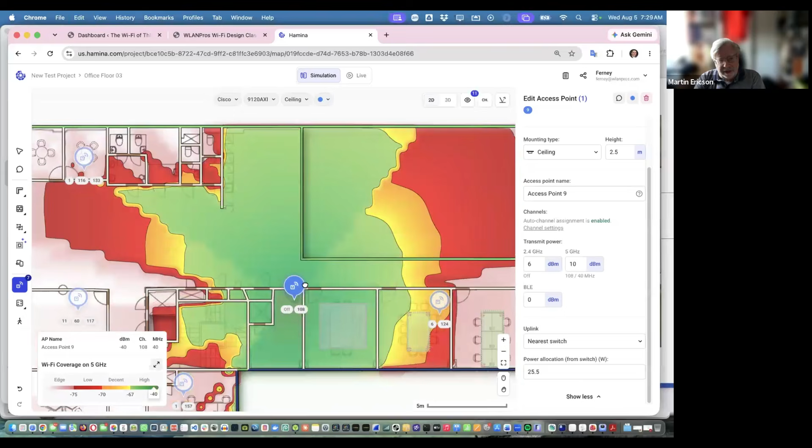Martin, go ahead. No, I was just thinking about something I saw when you talked about the different clients. I was once in the shopping mall in our town, and there was a guy demonstrating an RF chamber, which was small, so they could roll it on a trolley. He asked people to throw their phones in it, and he measured the quality of the LTE phones people were carrying. He said they saw a lot of different results, even in that chamber. And he said a lot of modern phones actually have the same issues as Keith had with his USB sticks.

They get small cracks on the motherboards, and the soldering gets small cracks when people drop it, and a lot of other things. So there is some kind of explanation, not just that the quality is not perfect along the product line, but it's also the way people have handled the devices, and we just don't know what kind of device people have. The devices are not calibrated, even brand new out of the box. If you get 10 devices, they're going to have different readings because that's how it is.

It was eye-opening that they were actually seeing that people were saying, my phone is so weak, and then the other one in the couple had exactly the same phone, and it was super good. And they tried to explain why. Okay, have you dropped it? Yes, several times. Okay. Yes, absolutely.

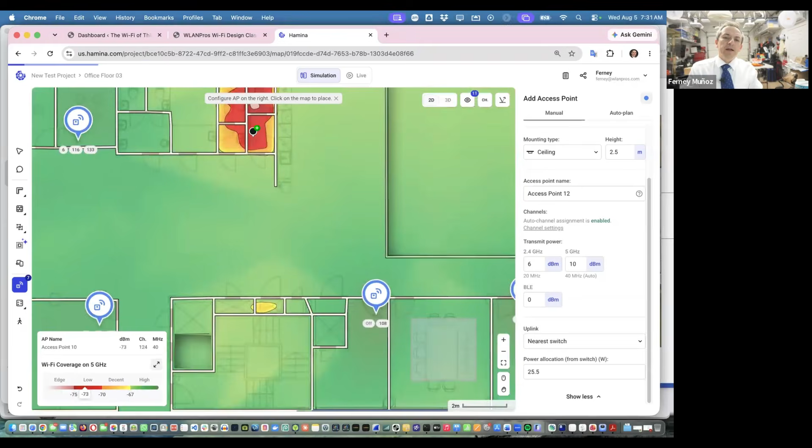In this case, I added access points on the 3rd floor, and we are addressing the coverage only. Notice that you may say, oh, that's a bad area. Well, what area is it? If it's the bathrooms, do you need coverage in the bathrooms? And then some people say, oh, no, get Wi-Fi outside of the bathrooms, because then people go in the bathroom, they're going to be on the phone all the time, and it's hard to get them out of there. But then, as I just showed you in this senior care facility, bathrooms are critical. I need to make sure that I have coverage in the bathroom.

Besides, I have designed Wi-Fi for hundreds of schools here in the US. And sadly enough, here in America, we have a lot of crazies with guns. And every time there was a school shooting, I started thinking, oh God, if that happens in one of my schools, I want to make sure that my schools have Wi-Fi everywhere. Because if there's an emergency, people hide in places where you usually would not put Wi-Fi. In the kitchen, in the boiler rooms, in the bathrooms, in areas that if you ask the principals or the people in charge... and I made that mistake many times.

It's like, hey, I'm going to upgrade the Wi-Fi here next summer. Where do you want Wi-Fi? Oh, man. Principals and all these people in administration, they love having meetings. So I had meetings, and then they started asking, hey, Wi-Fi, who wants it? And then the gym teacher said, I want Wi-Fi here, but I don't want it back in the locker rooms and in the bathrooms. Then people go there and stay there, and it's hard to get them out. So no Wi-Fi in there. And then another was like, oh no, I read that Wi-Fi gives me headaches and gives cancer. So don't put Wi-Fi in my room. Put it in James' room next door.

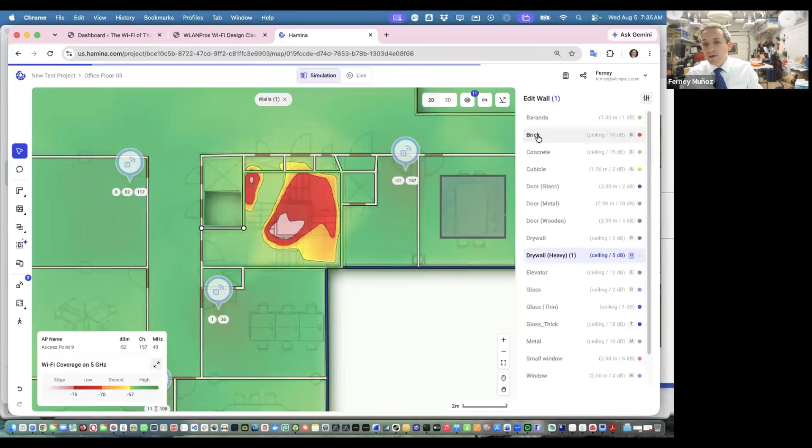So now the signals in there are not going to be that good. Yeah, it's just physics, it's waves. If you have an access point here, it sends waves, those waves have to go through walls, and if those walls are thick and dense, then the signal there's not going to be very good. Do you want Wi-Fi in the stairs?

And if they say no, we don't need it out there, then okay, you can exclude this area. You go back to the scope zones, and if I draw a scope zone, let's say in this block in here, it excludes that area. Does that mean there is no Wi-Fi in there? No, there is some Wi-Fi in there. It's just not showing me color-wise if the signal is good or bad. It's just not accounting for that area in my project, in my pass-fail rate, basically.

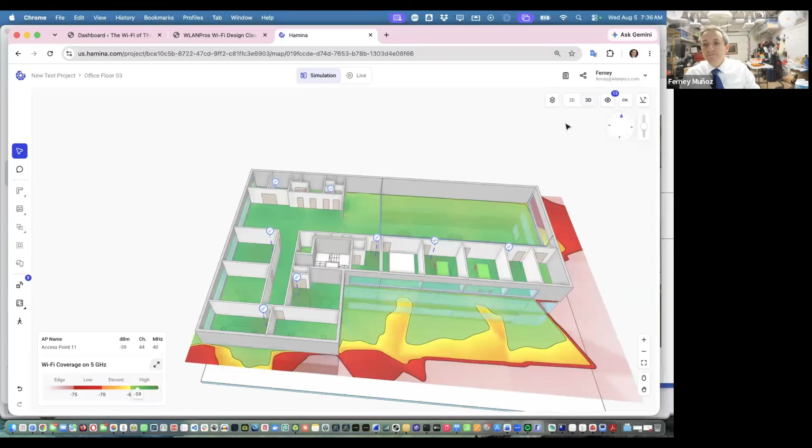So, yeah, go ahead. The way I'm dealing with this is I usually plan for 2 SSIDs. One is guest 2.4 and 5, and the other is corp 5 and 6. For guest, we have just a few access points at the maximum power level, so I can cross walls, I can cross everything. Guest is focused on coverage, and the other is focused on performance. This way I can enter bathrooms, stairs, etc. So I think this is the way I sort it out.

And also addressing all those devices. Like if they are 2.4 only, I ended up with clocks and lights and all those things that didn't do 5 gig, but they were essential. So I created an SSID in 2.4 only, just for those devices.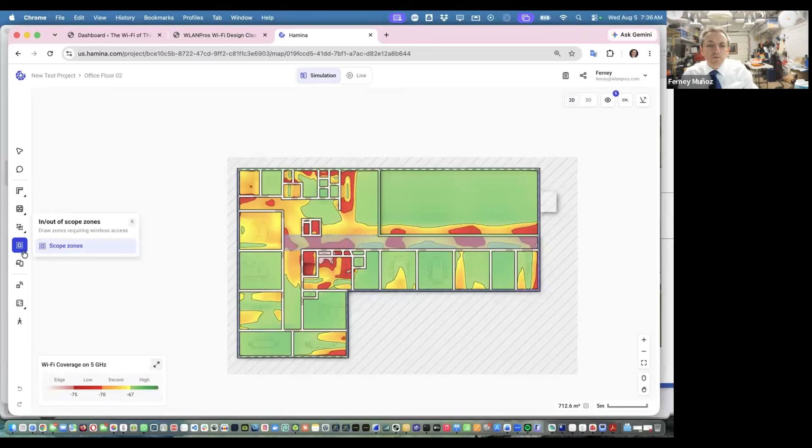Now, when adding the access points, notice I just went to the 3rd floor and did them. If I go to the 2nd floor, I'm going to have to do the same thing, start placing access points wherever I need them. But there is a tool in here. See, I can choose the access point and manually start placing them. The good thing is the design is going to show me where I have access points on the floor above. See, these circles show there is an access point up in that room.

I know in some documents they say, you got this, then just copy paste to all the floors and all the APs will be in the same place everywhere. That's a bad idea, because you have an access point here, and in the room above, there is another access point. They're just like 3 meters away from each other, and depending how thick the floor is, they don't know where they are vertically, they just hear each other. And if I hear you really strong and we are on the same channel, then I'm going to start changing power levels, changing channels, and then RRM may start misbehaving. So the recommendation is to stagger them.

But the reality is that in a lot of places they do this because it makes sense. The bathrooms are all right above each other because you have the water pipes and the drains. Data closets, it makes sense to have them right above each other because you just put a 4-inch hole, put the sleeves there, and you have a direct vertical path from one data room to another. But when it comes to access points, you probably want to stagger them a little bit.

So the nice thing about this, if I want to start adding things manually, maybe in here I want to place the AP in the room that is adjacent to that one, not right below, then I can stagger them and stagger them, okay? So they're not right on top of each other. That's one approach.

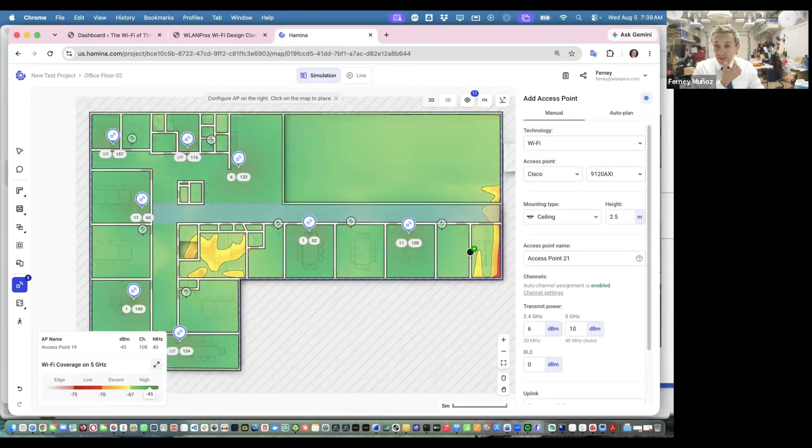It doesn't matter what you do in Wi-Fi, somebody else is going to come and tell you, no, Ferney, you're doing it wrong, that's not how we do it, let me teach you the right way. It's okay. There will be people with their ideas, their opinions. You need Wi-Fi in the stairs. I mean, we drew the slabs yesterday, then we're just doing this as we go.

Here's the other way you can do this. There is an auto plan.

If you go to auto plan, you choose the access point. Let's say I want to use the Aruba 635 model. Then I'm going to say I want to place this guy, 635. Here we go, and select it. Then I'm going to specify the height. I'm going to specify the power I want to use.

And here's what's going to happen. If I say start an auto plan, it completely removes everything I had done. And I think it did it. Let's see if it did it on this floor, if it did it on the other floor. I think it just did it on this floor.

Let me make sure. Where are my glasses? I need my glasses. Need my eyes.

For the most part, it will do the entire project, but it seems to me that it kept the access points I manually placed on the floor above. Yeah, things like this. These guys didn't move. So that auto plan seems like it did it only on the floor I was on. Let me see if I can specify here where to do it. Usually it does the entire project, but it only did that floor.

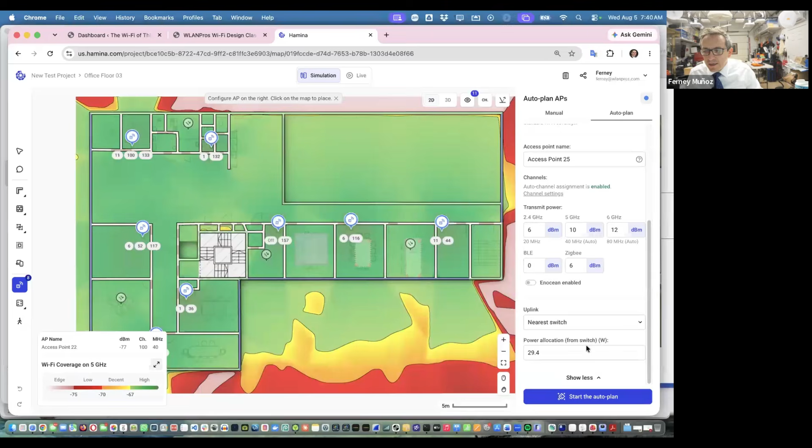Let's see if I do an auto plan in here. Planning assistant, never from scratch, but only on this floor. I'm gonna have to ask Jerry about it. Since the area here was not defined, it even placed APs out there. And we're on the 3rd floor. They are floating out in the air. Yes, the software is smart, but not as smart as we humans.

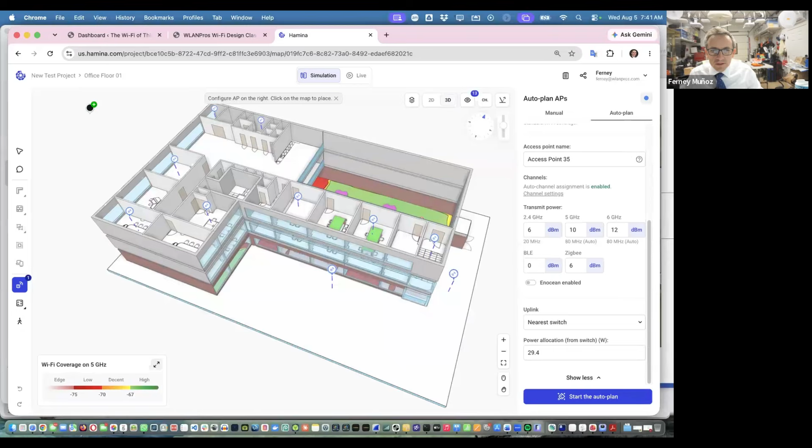This is important because here you decide which channels you're going to be using in 2.4, and you ask to disable interfering or just enable all of them, and then what channel widths you're going to be using. Now, notice that if I choose 80s, it starts with 80s, and if interference starts getting too bad, it automatically, dynamically starts going to narrower channels. So here you can do the same thing for 6 gig, define the channel width and the channels you want to be using. This is for the project.

So if I go to channel settings, see here where the little I is, you can decide what you want to see or what you don't want to see. Next to it, there is a channel button that takes you to the same place of the settings for the project where you can decide which channels to use. There are some regulatory domains where certain channels are not used, or a client. Tom, going back to the client, in some places they have clients that are not very good with channel 165. So in that case, I'll just come in here and say do not use channel 165.

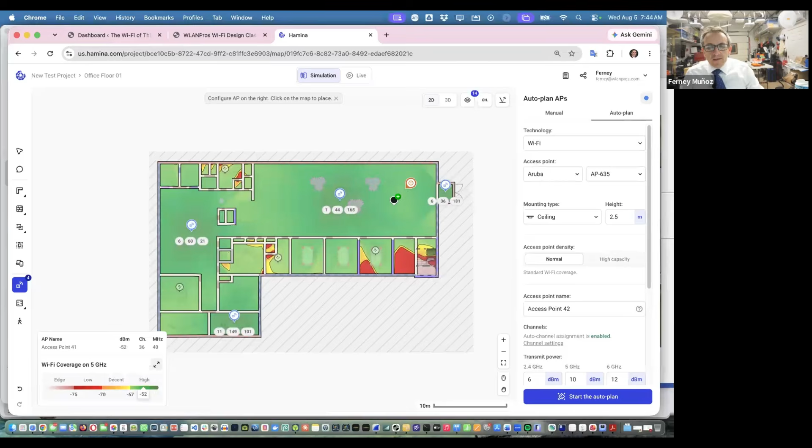Let me do the auto plan and start an auto plan. It will remove whatever APs you have there and place new APs. When we are placing APs automatically, notice that it places some AP at, like, that's the entrance. I don't need an AP there. The software doesn't know. Like, well, you have that as an area that you need coverage.

Let me just add an AP there. And then it didn't add enough APs because this area doesn't have any APs in here, okay? So I'm going to have to come up and manually start supplementing this. So these auto planners sometimes go crazy.

In Ekahau, I did one building once that put like 300 access points in a place that I only needed like 7. There was a bug or something. Here in Hamina, it's done it too. I did a design with auto planner once that placed one AP like every 1 meter. I mean, that would be the dream for a salesperson, huh? Like, yeah, you need 200 access points. Like, no, you don't.

But in this case, the placing of access points right now, we're just doing it flat with omnidirectional ones. Given the time that we have right now, what we're going to do for now is just show a couple of things. And then tomorrow we're going to use directional antennas and we'll work on warehouses tomorrow, okay? Different heights, different type of antennas, different orientations, different locations.

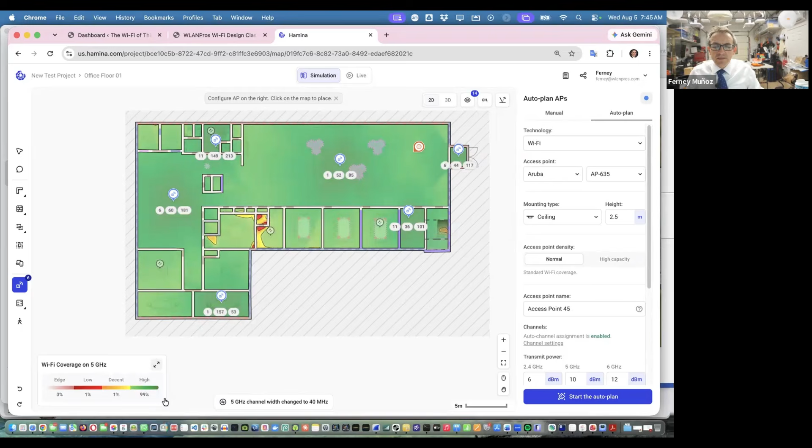Now I have Wi-Fi selected and I'm looking at primary coverage where I have at least one signal at whatever level I need. If I'm designing for -67, then I set this value here. And then, let me just Control Z, as I look around wherever it's green, there is a signal of -67 or better. If I switch to secondary signal, what it's showing right now is where I have not just one, but 2 signals covering a place, show me green. Wherever is not green, there are not 2 signals there.

And here's where some people struggle. Say, but why is that not green if there is an access point in the room? Because I'm looking at secondary signal, not just primary. Primary signal is where I have coverage. Secondary signal is where I have 2 signals covering that place in this band, in 5 gig. And it shows you right there. There's access point 38 at -44. That's this guy.

How do I see the AP names? If you go to the little i, you can say like, hey, show me access points and show me also the access points from adjacent floors. See that one, up above, there is an access point in there. If I say, don't show me those, show me only the ones on this floor, I like to see those. If I want to see the channels, there they are. If I don't want to see a channel, then I don't see a channel. If I want to see labels, that 38, that's the AP number. If I want to see the name, access point 38, that comes in extremely handy. We're going to see that tomorrow when we start adding names and naming convention to the access points. So let me just leave that.

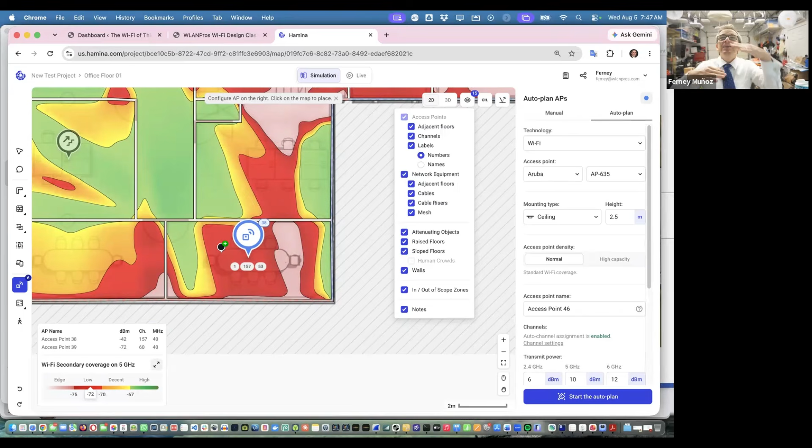If I put my mouse over here, notice to the lower left, it says AP name. AP 38 is at -42. So that AP in that room is at -42. But the secondary signal, the second strongest signal I see is from AP 39. I don't even see AP 39 in the picture. Let's see, AP 39, that's that guy over there. So that guy is sending waves, double distance, and then it comes here. By the time it hits here, what it's telling me down there is that the second signal comes from AP 39 and it's not very strong.

Now, why would I need two signals covering the same place? Redundancy. If this AP goes down, then the second AP covering is too far away. There's not going to be coverage in here. So for redundancy, I need two signals. So if I need another AP covering this, what do I do? Well, place an AP next door, man. See, now I have two signals in here. I have the strongest one, -44, coming from AP 38 right there in the room. The second strongest signal at -49 comes from AP 46, which is next door. So now I'm providing two signals for redundancy.

For capacity, if I have a place with lots of people, then I need two, maybe 3 or 4 signals covering the same place. To have, I don't know, 50 devices per radio, then you need multiple signals covering the same place. For roaming, if you have phones and you have voice in this location, then you need two signals. Why? Because if you're connected to one AP and the signal is getting weaker, what do you need for that device to be able to move to another AP? Well, you need another AP, another signal covering that place. So for roaming, you're going to need multiple signals.

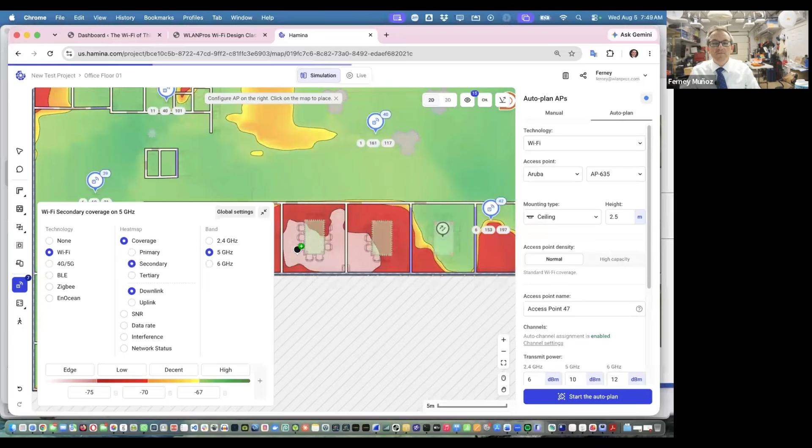But if I need a second signal for redundancy or capacity or roaming, then I need more APs. So let's place another one in here. Now, I start manually filling up those gaps. If I need a secondary signal here, maybe I place an access point here. But since I already have one up above, then maybe we just place the access point out here, but depending on the construction and the place, maybe that is sufficient.

If you don't need the stairs, then remove it, exclude it, or just place an access point there if you need two signals. If you still don't have two signals, then let's probably place one in here. And then that's the game. Right now, we're just providing primary and secondary coverage everywhere. Same story here. If you need more APs, then you place more APs. That's it. But that's going to cost more money. I know. But if you want redundancy everywhere, you're going to need more APs.

I had that at a warehouse in the Dominican Republic, and we're going to talk about warehouses tomorrow. They said, yeah, we want redundancy. Then I placed two APs, one at one end of the aisle, another one at the other end. And then when the proposal was sent, like, yeah, but that's too much. Okay, remove APs. So we removed APs. But then there is no redundancy. I know. What do you want? Redundancy or a cheaper project? Because you're not going to have both. If you want two signals everywhere, we're going to need more APs. It's just as simple as that.

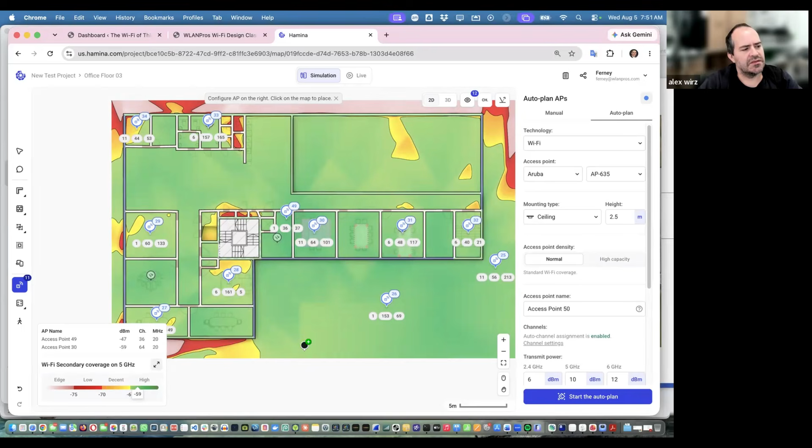Ferney, if I'm not worried about redundancy, but I'm worried about seamless roaming, I think the way I place the access points could be a bit different, right? Oh, absolutely, yes. Right now we're just playing with coverage. That's another thing, and we'll talk more about this when we get to designing, like in the stadium, and designing high density, because the location of the APs when it comes to roaming and hallways, we'll cover that tomorrow.

I think with this, no problem. We're coming to the end. Let's see if there's any other. Tom, did we answer your second question? What was the other question? I even forgot. One was what client do you use in mind? Okay. The second one was about roaming.

So in Ekahau, it's not very elegant on a validation survey to see how and where your client is really roaming to. You can do it, but it could be better. The reality is, in Wi-Fi, you cannot design where the roaming areas are. That's just not possible. In cellular, you can, right, Guillermo? You can define exactly: I want this to be my roaming area. Not in Wi-Fi.

And I had this because we did a survey for these people in San Jose, the city of San Jose, and we got to a point, they said, I want this to be a roaming area. Like, what do you mean? Like, I want that when people associate to that AP on that traffic light over there and they're walking down the sidewalk, when they get here, I want them to roam to that AP on that stop sign over there. Not in Wi-Fi. It's not going to happen.

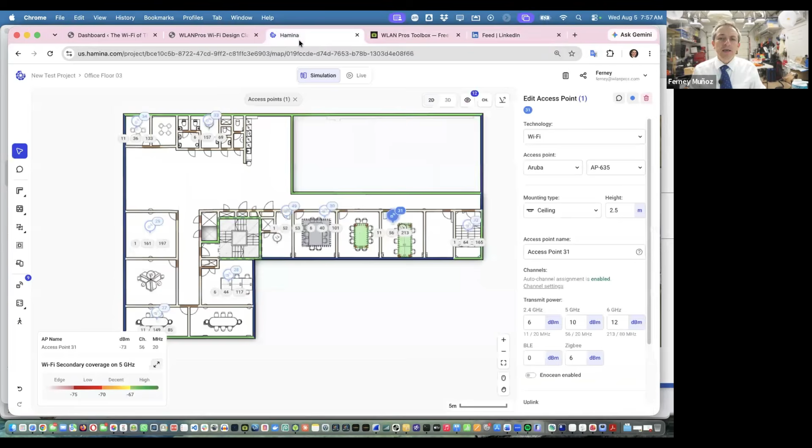In Hamina, let me just open a survey, because I do not think that it shows it the way we want. If you were associated, let me go to this client view, and see if it actually shows the actual association, or if it just assumes. Let me ask Jerry that, because, again, active surveys are useless.

They have no value. I did that presentation in Phoenix earlier this year, where I showed this active throughput stuff. I know people ask for it, people request it. Tom, go and do an active survey. And then it's like, why? Well, because active sounds better than passive, isn't it? So people think that an active survey is the way to go.

No, passive survey is what we do, because active just shows you the experience you had that day with that device, given the conditions you had at that moment. That was probably the best point I got out of your talk, getting that to sink in. Hey, wait a second, that was that period of time. It doesn't mean an absolute across the board. And that's the problem. Actually, watch that presentation I did earlier this year about throughput testing. And yes, we'll have another session where we cover all this stuff.

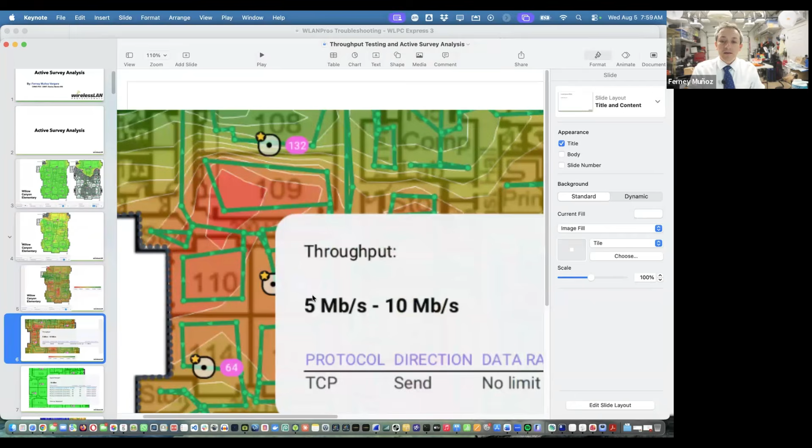But here's the main problem with this active survey stuff. See, this is exactly what you were asking for. See, throughput, where it's red, is bad. And it shows like, yeah, that's a bad location. That's a problem. We analyze active throughput data in place. Oh, room 109 is a horrible place. See, it's red. Yes, when I was there, I was getting 1.1 megabits per second. It's a horrible place. Put an AP there in room 109.

So even if I show you where I roamed this day, what does that mean? Because during the burst of your data, you didn't roam to a good access point. Absolutely. It's completely useless. But people ask you to do active surveys because it sounds more active, more attractive. So you do an active survey. And then they want to know the throughput of your network. Where, when, what AP was I connected to?

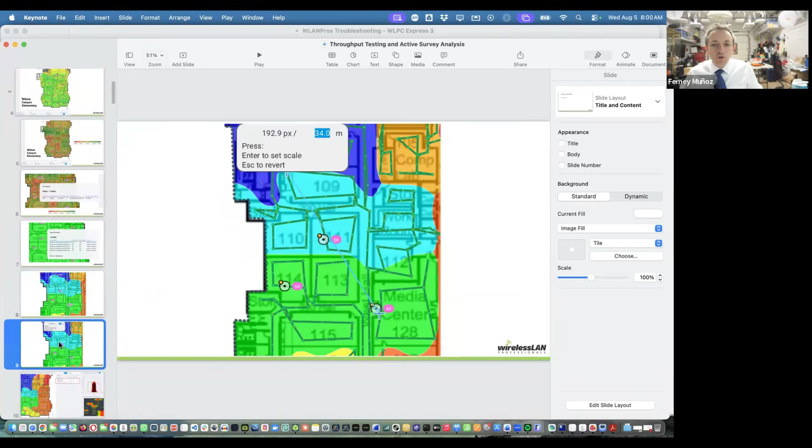Because one of the things I was experiencing here, the reason why I was at 1 megabit per second, is because I was associated to an AP that was 34 meters away.

This is America. We don't use meters in here. Okay, about 37 yards. How's that? You feel better now, Tom?

Okay. 37 yards away. Going through 1, 2, 3, 4, 5 walls and doors and people and bookshelves and stuff. This is a school. You're associated to an AP that is 37 yards away. Yeah, I had a bad day. Not a bad place. But my device didn't roam. And even if I show you where I roam, what does that mean? That doesn't mean everybody's going to roam right there. It just means that that day with that device, depending on what I was doing and the AP where I was, that's where I roamed.

Completely useless. All right. With this, my friends, we come to the end of session 366 of Tesos and Wi-Fi. These sessions get really interesting. See, our plan was just like, hey, I'll show you how to place APs on a map. And then 2 hours later, we have not covered that much, but we covered many other really important things. That's the best part of this class. And we talk about Ekahau and Hamina and Tesos, and we're going to be covering all of those later because we're not in a hurry. We don't have a schedule to meet or an agenda to go through. I'm not here to just talk about one product. We're talking about Wi-Fi. That's what we're doing.